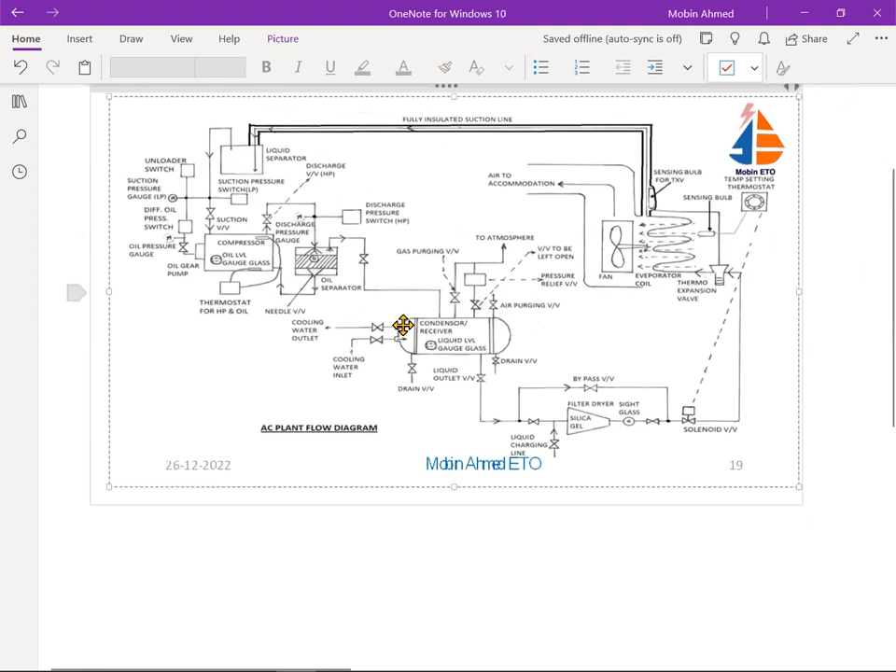Okay, let's start from the AC plant today. AC and refrigeration. We'll try to see this one and try to complete it today. Here is a diagram of the flow diagram, you can say, or P and I diagram. Generally it is known not as a flow diagram, but P and I. So let's see how it is going to work.

Before going to this one, I hope everybody knows about this pressure enthalpy or temperature entropy diagram, because that is important to understand. So we will talk a little bit about this. Now basically any refrigeration plant which is going to work is going to do basically 4 processes. AC or refrigeration systems do 4 processes. So what are these 4 processes?

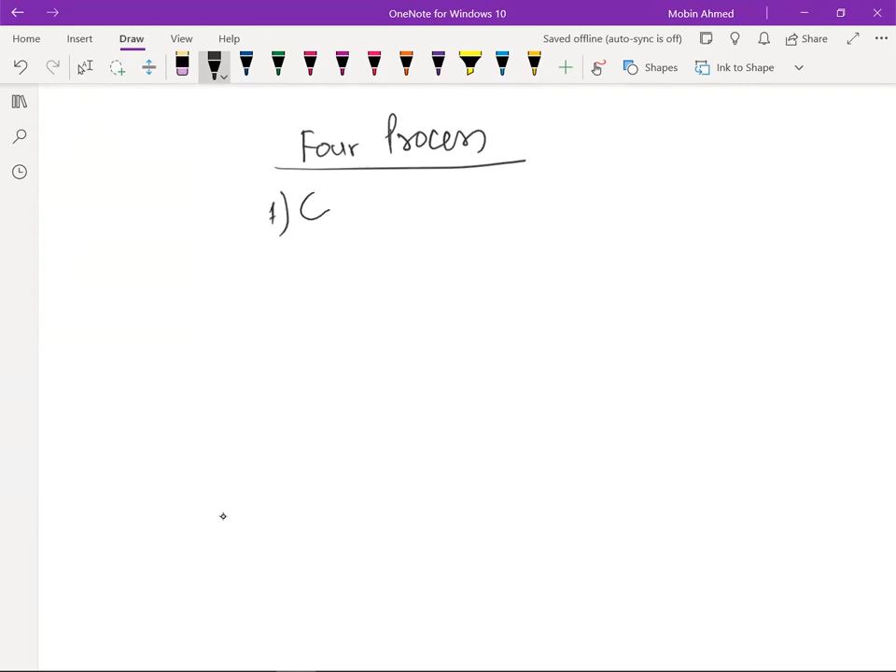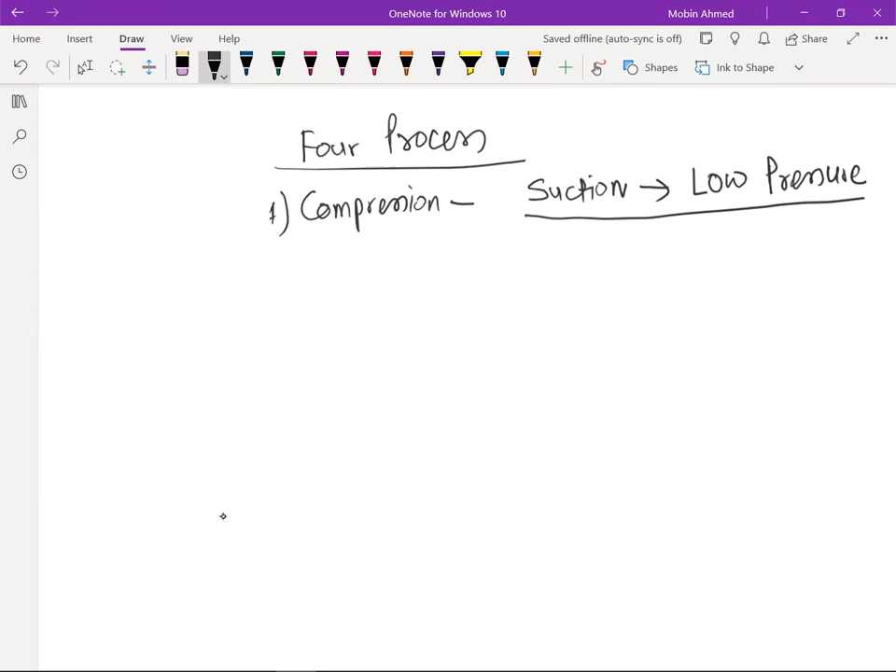First is known as compression. That means whatever vapor is coming to the compressor, that is the low pressure side or suction side. So that is known as the suction. This suction is low pressure. And that's why sometimes we say this one is an LP line or suction line. Okay, so this is the LP line.

So this low pressure, what is low pressure basically? What is coming to the suction? So the LP line is supposed to have only the vapor. That is what we say in general language, gas. So only the vapor is supposed to be coming to the suction line.

Now, when it is going to be compressed by the compressor, after the compression, it is going to rise the pressure. Then there is going to be the discharge line. This discharge line is also known as a high pressure line, or HP line.

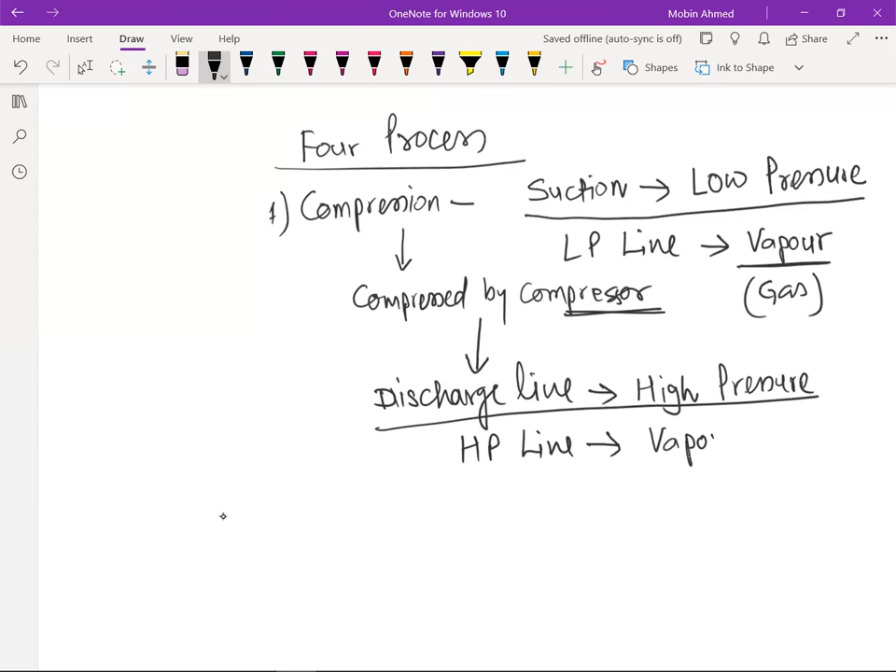When we say HP line, this is the same vapor, but now after the compression, the temperature and the pressure both are increased. So it is going to have high pressure, HP, as well as high temperature, HT. When it is entering, this is LP and also LT, low temperature and low pressure. We'll talk about this low pressure, low temperature, high pressure, high temperature also.

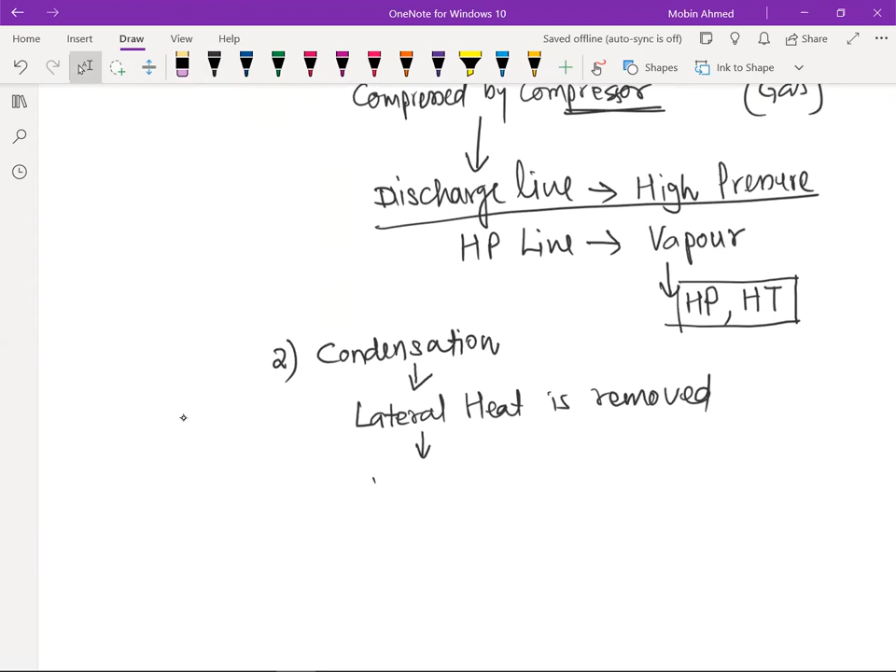So after this one, there is going to be condensation. This is the second process. In this condensation process, basically we are going to remove the latent heat. Latent heat is removed. Now, when we talk about the latent heat being removed, the vapor is still going to be high pressure and high temperature. Only the heat is removed.

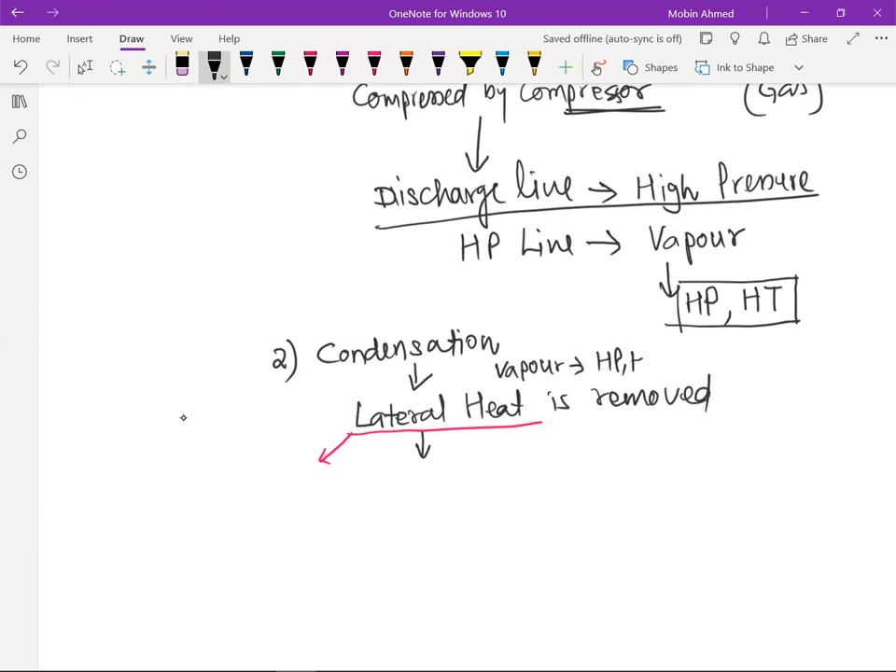Now, what is the latent heat? First of all, I must write here, condensation. So we are going to condense the vapor. And this vapor is of high pressure, high temperature, which will change into liquid of high pressure and high temperature. So what is the latent heat doing? It is changing the vapor into liquid, and this is known as condensation.

What about the pressure and temperature? That is going to remain same. There will be no change in that. Only it is removing the heat, so it will change from vapor to liquid.

Now, the third one is known as expansion. Expansion means to expand. What are we expanding? We are expanding the volume. How is the volume going to be expanded? That means the dia. Now here, expansion means we are going to expand.

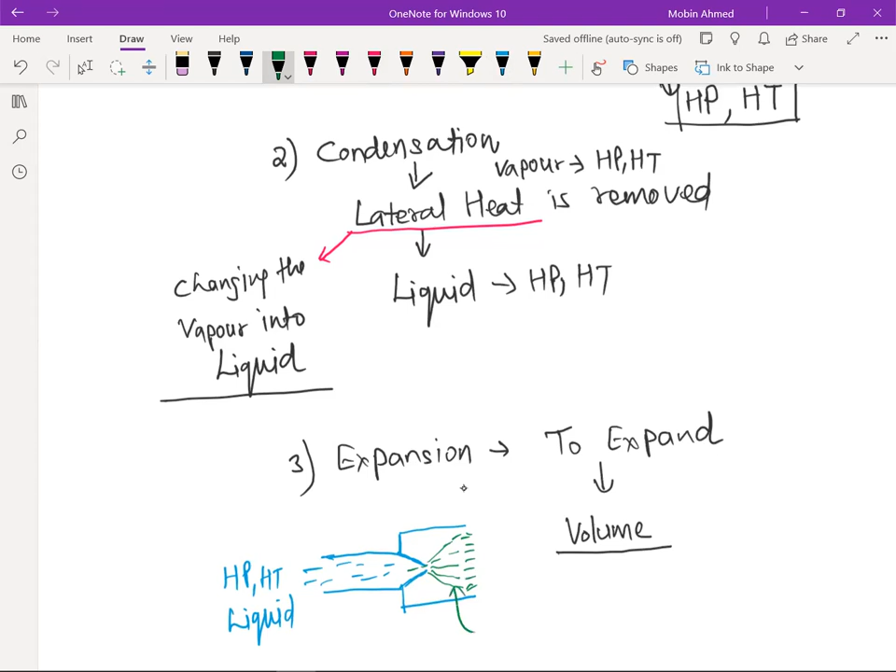So it is going to be a mix of vapor and liquid. That is the one thing when it comes out.

Second, the volume is going to increase. How? Just see here the dia. Suppose this is the dia before the expansion valve, it is D. Then the dia after the expansion valve is going to be 2D, double the D. So the area has increased.

Once the area increases, it is going to expand. So volume increases, and whatever mix of vapor and liquid is there, it is going to expand. Now when it expands, both things happen: the pressure is going to lower, LP, and the temperature also decreases, LT. Both will be there during the expansion. Temperature drops and pressure also drops due to the expansion. So this is known as the expansion.

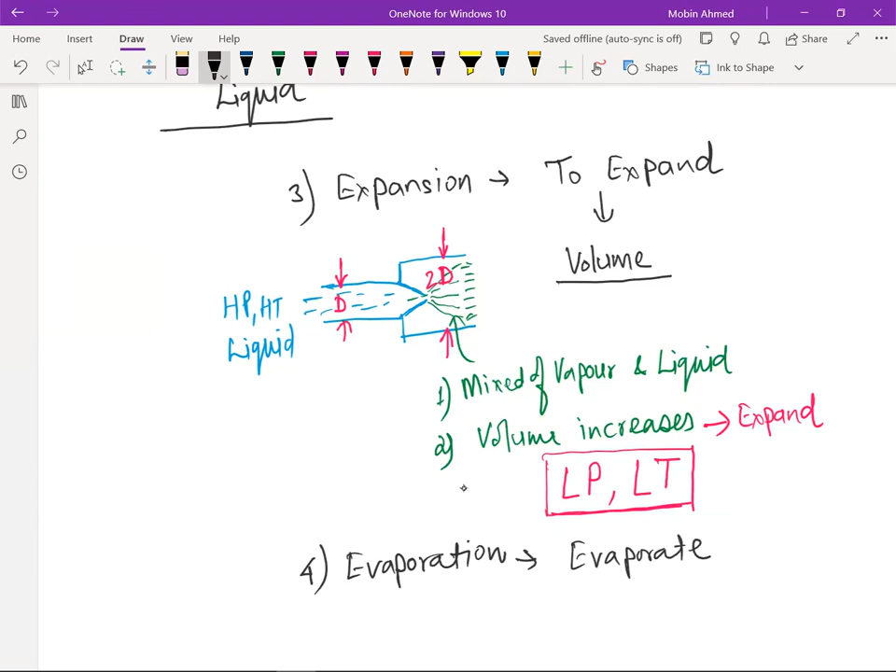Now the fourth one is known as evaporation. Evaporation means to evaporate. What we are going to evaporate now, whatever this low pressure mixture of vapor and liquid is there.

Because it has low pressure and low temperature here, when it passes through the evaporator, it is going to boil off. This vapor and liquid, especially because these are tiny droplets, will boil off because it is going to take the latent heat.

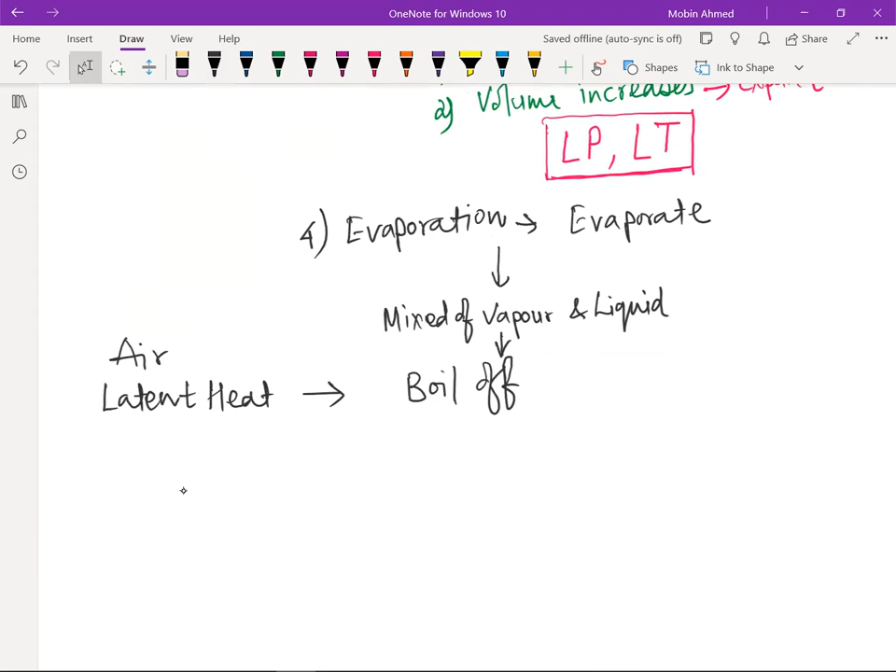Now again the latent heat has come. So it is going to take the latent heat, that is the latent heat. Whose latent heat? This is the latent heat of the air. Here, because we have a fan, it is going to blow the air, and the latent heat of that air will be taken by this vapor and liquid, meaning it is going to boil off.

So what happens when it passes through the evaporator and latent heat is taken by the vapor, this air is going to be cooled down. This is how it cools down, and it will boil off because it is low pressure. So the boiling point is decreased.

Boiling point is decreased. Now when the boiling point decreases, it is going to boil off at the low pressure. When it comes out from the evaporator, it changes into vapor, and this vapor is known as 100% vapor. This 100% vapor is also known as saturated vapor. Now the word saturated vapor has come, we'll talk about this.

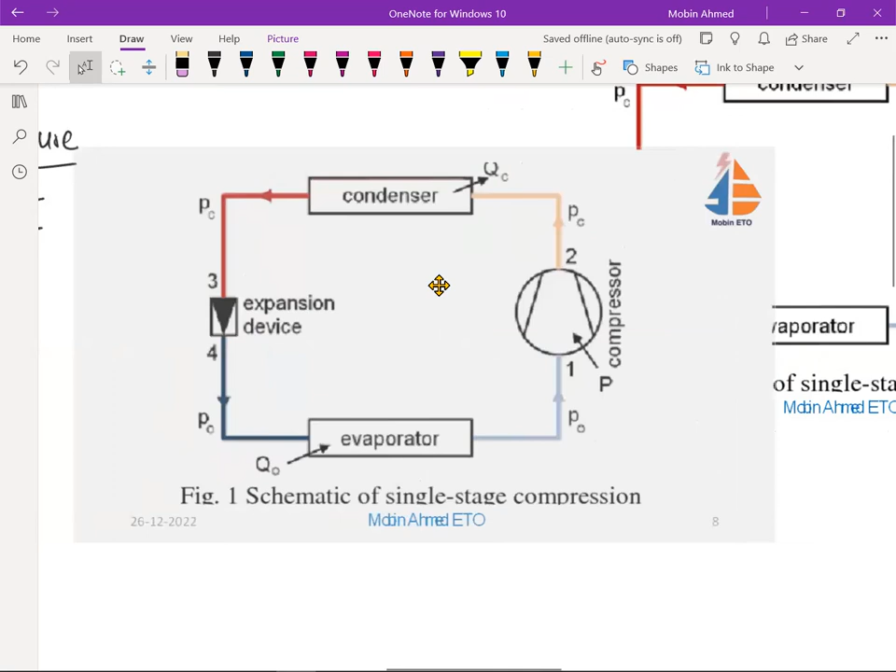These are the four processes, what I was telling you about. These four processes is basically: compression by the compressor, then condensation, then expansion, and thereafter evaporation. So: compression, condensation, expansion, and evaporation.

In compression, here it is going to be PC. Remember this PC. QC is the latent heat, this is the latent heat. And this is the PC. Again, it is going to be PO. QO is again here the latent heat, it is talking about the latent heat. And again this is the PO, and it is going to the compression.

Now when we see about the temperature, here also it is going to come along with TC, it will be PC and TC. Here also TC is going to come, then there is going to be TO, and here also it is going to be TO. What I have written, you will see in the next graph. You can take a screenshot of this.

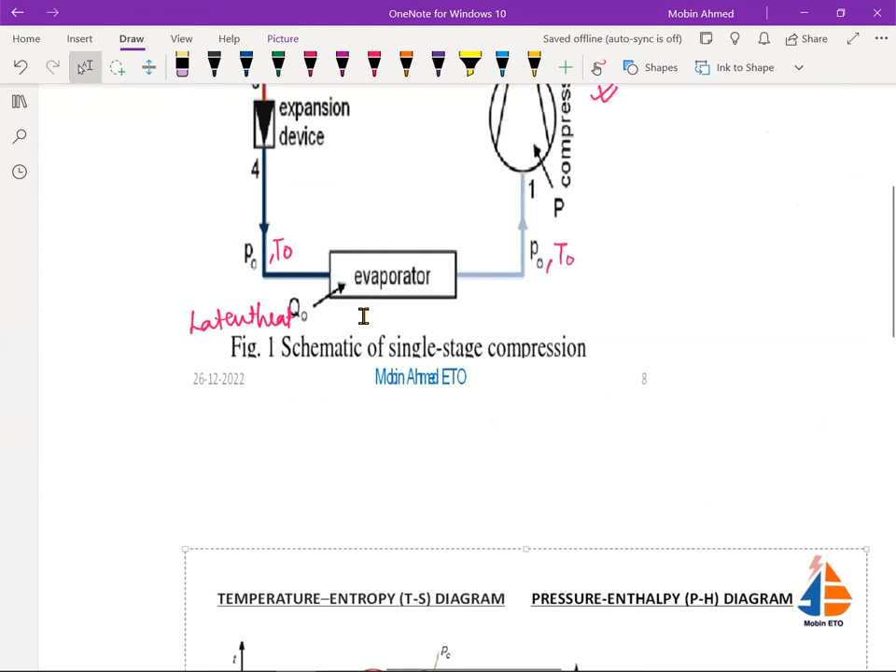There is something known as a temperature-entropy and pressure-enthalpy diagram. No, I am not going to teach you this fully, I just want you to understand this one because it is going to help you understand many things. That's why I am teaching this.

Now when we see the temperature-entropy and pressure-enthalpy diagram, there is a critical point in this one. This is known as the critical point here. The top one, that is the critical point, CP. From the CP to x equals 0, can you see here x is equal to 0? Here also x is equal to 0.

This is known as the saturated liquid line. This is the saturated liquid line. Same, you see here also it is the same.

Then we see here something, this one. This is known as the saturated vapor line. And this saturated vapor line is here also, it is the same. So both graphs are having the same: this is a saturated liquid line and this is a saturated vapor line.

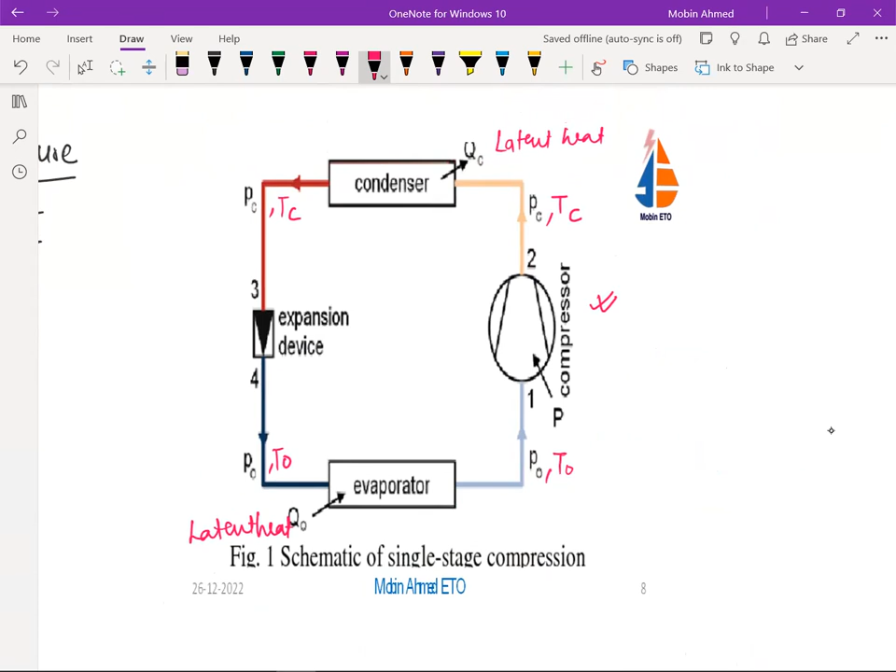Now we are going to talk about the compression among these four processes. If you see this process, from 1 to 2, this is a compression mode. This is a compression. Similarly here also, it is the same, it is a compression. And that is what is shown here: 1 to 2, this is the inlet and this is the outlet.

Now what is it compressing? You can see the inlet of the compression is 100% saturated vapor, or we'll say saturated vapor. Now in this case, the pressure is also low and temperature is also low. That will be the same going to this point. This point is the same, okay, saturated vapor. So this is going to be the same at 1, 2.

After the compression, what happens? The temperature is going to rise and pressure is also going to rise. So this is going to be HP, and in this one we see this is going to be HT. So this 1 and 2 is a compression, so it is going to be high pressure and here it is going to be high temperature. Temperature will reduce a little bit, but still it is going to be high temperature.

So from 2 to 3, or here also, when it is going to enter the condensation, we'll say 2 prime here. Here also I am going to write just 2 prime. So from 2 prime to 3, or here also 2 prime to 3, this is known as condensation.

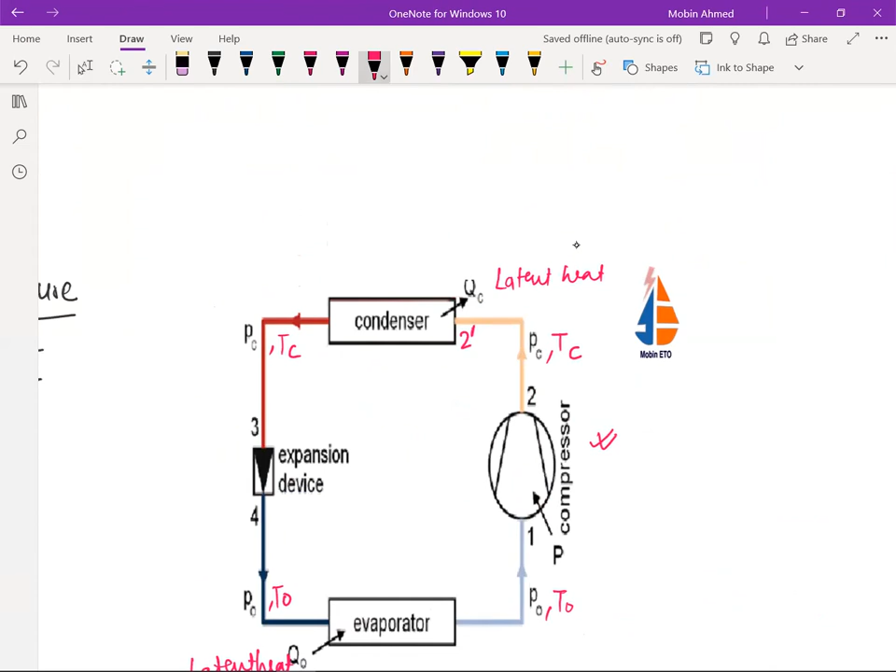Condensation, so this process will start. Here also it is condensation. What you need to notice here is that your pressure is not going to decrease, neither is your temperature decreasing. It is the same line. Here also you can see the temperature is constant, it is not decreasing. From 2 prime to 3, the pressure is not decreasing either, it is same. This means during condensation, the vapor is going to change. So we'll say this is 2 prime, and this is 3 which is coming out from the condensation, that is going to be liquid.

In this case, the latent heat is being removed. So during condensation, the latent heat is removed. Who is removing it? By cooling water. So cooling water is going to take the latent heat, and it is going to change the status from vapor to liquid. When it reaches point 3, it is going to be 100% saturated liquid. So after the condensation, when it reaches, it is going to be 100% saturated liquid.

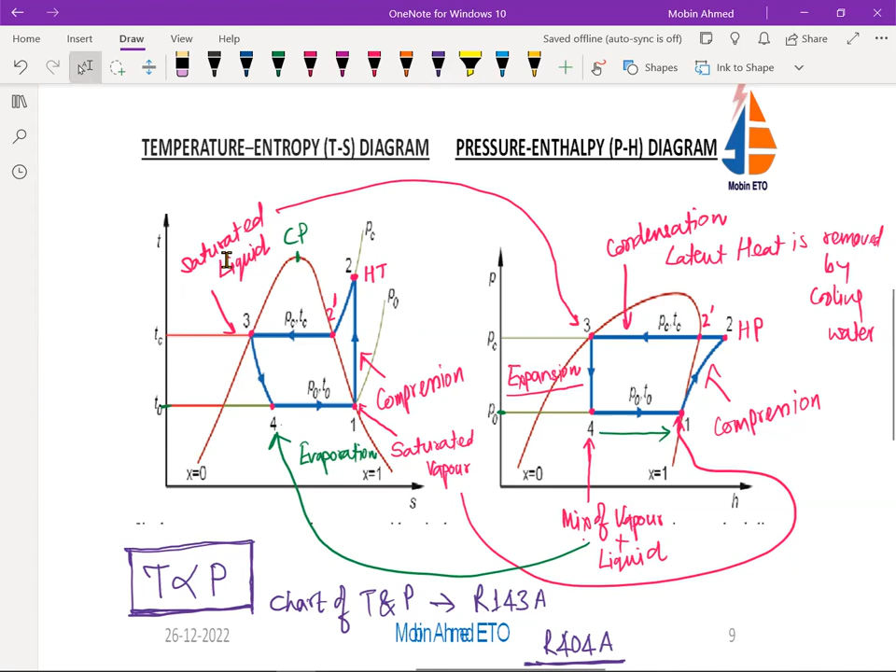If you know any one of them, the second one you can calculate from the chart. Okay. Now, why it was important to tell you, so you can understand. If I say saturated liquid, saturated vapor, mix of the vapor and liquid, now you understand. That is my main motto to tell you about this one.

Okay. Now, let's come here and try to understand this one. This is the diagram, and from the exam point of view, we are going to see each and everything. If there is any question that is asked by the surveyor, try to ask me so everybody knows what question they are asking. Okay, and we'll try to understand how this works.

I will teach you from the view of the electrical system, what all cutouts are there, how they are working and all. I am going to touch on temperature and pressure, or when it is going to change from the liquid to the vapor. That I will be telling you. That is what the flow diagram is. But I will be teaching you all the things from the view of the electrical.

Okay. Now let's start. Here, as I have told you, the compressor, this is the suction line. From the suction valve, it will come here. So this suction line is an LP line, low pressure line. Now, as I have told you, the suction line or LP line has to be saturated vapor. Means when it is entering the compressor, it has to be saturated vapor.

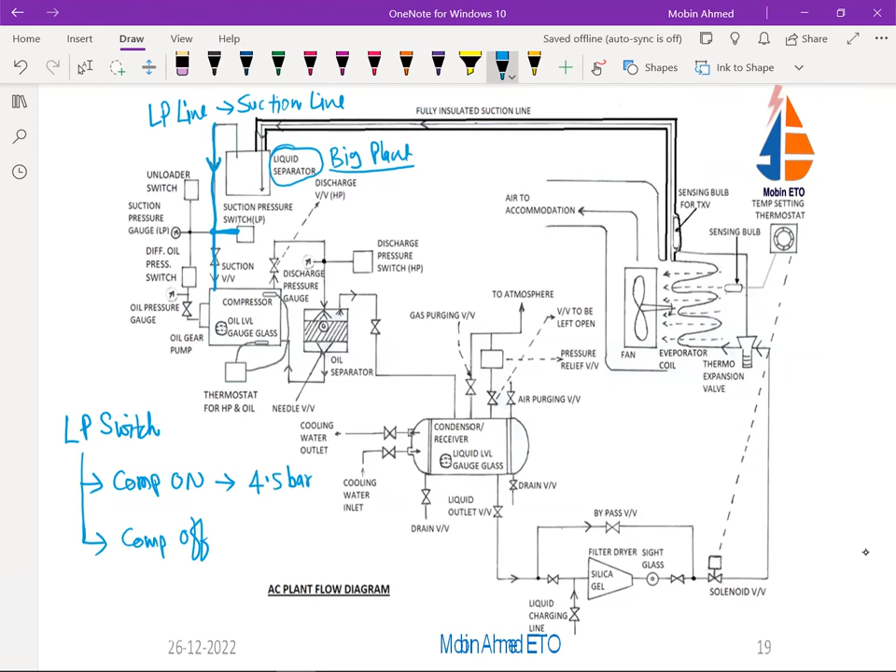So when the LP, that is the low pressure, is somewhat like 4.5 bar, suppose I am taking here 4.5 bar, the compressor is going to be on. But when your LP comes to 2.5 bar, it will be off. So it will protect the compressor from working like a vacuum pump. That's why it has to cut out at the low pressure. Remember this one, this is the LP: at 4.5 bar the compressor will be on and at 2.5 bar it will be off.

Whatever data I am giving will differ from model to model. Whatever I am writing here is just to make you understand how it works. Okay. Hope you understood this one. Now, this is the LP switch. It is a simple switch. One line of the pressure is given to the switch, and the switch is going to work on this, 4.5 bar to 2.5 bar.

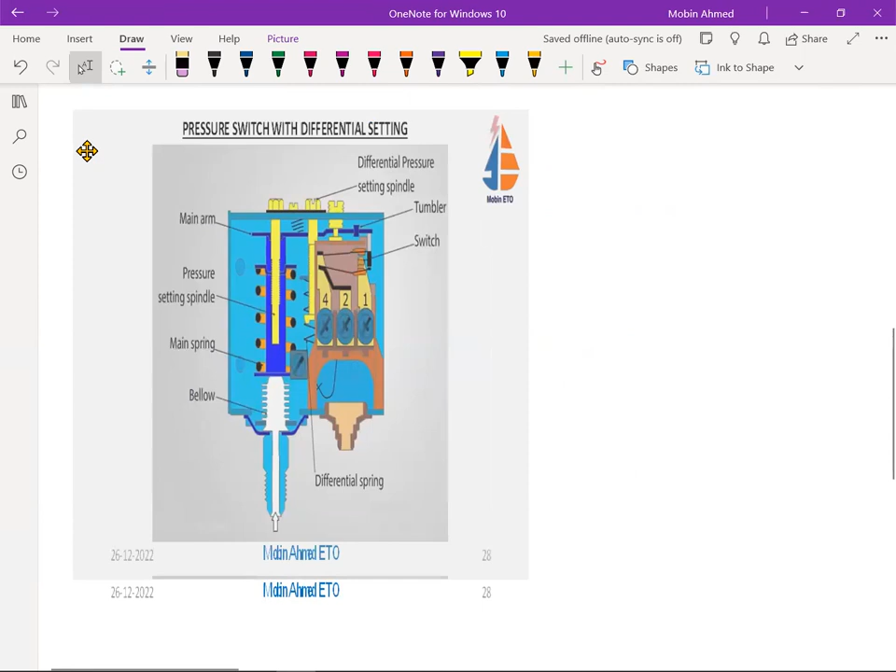How this LP switch looks, if you have seen it, it's okay. If you have not seen it, I am going to show you. This is a pressure switch. You can see. And this is also known as a differential pressure switch. Remember this one. Or this is a pressure switch or differential pressure setting panel. I will tell you about this one.

So, pressure switch. Now what happens in this one when we are going to set the pressure? Here we are going to have two knobs. One knob is here already.

Okay, this is the knob, and the second knob is this one. This is a set pressure. So we are going to have a differential pressure and there is a set pressure. Now as I have written there, you can see 4.5 bar and 2.5 bar. Now, sometimes you are going to see in this differential pressure switch, there are two variants of this one.

One variant says that the cutout is cut-in minus differential. Sometimes it will be written like this: cutout is equal to cut-in minus differential. So what is cut-in? This cut-in is this one, that means 4.5 bar. What is the difference we are setting? 2 bar. So 4.5 minus 2 is going to be 2.5 bar. So this is the cutout pressure and this is the cut-in pressure.

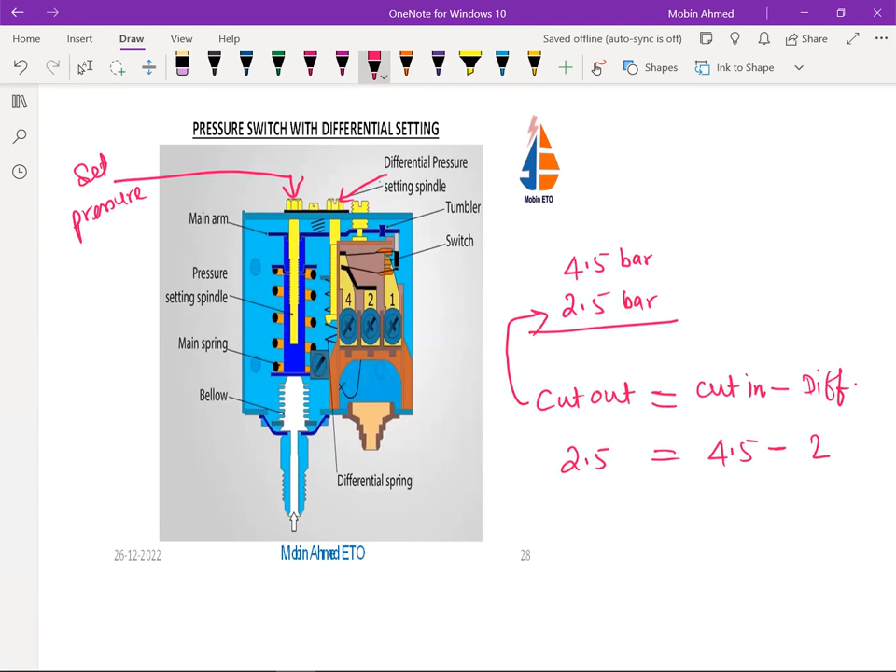That means we are going to have a set pressure here. This set pressure is going to be 4.5 bar. So we are going to set here 4.5 bar. What is the difference pressure we are going to set? That is 2 bar. So this is the setting we are going to do here with this one, and this is the setting we'll be doing here. Now it is going to operate at 4.5 bar, it will be cutting, and at 2.5 bar it will get cut out. Hope it is clear to everyone. So this is the setting of the LP switch.

Now comes the unloader. So this is the unloader switch. The unloader switch is almost the same. It is a direct pressure switch only; generally the differential pressure is not there in that case. Now what is this unloader switch? You can see here there is another switch given, and the same suction line or LP is given to the unloader. So here we are going to have the unloader. Now let's understand about the unloader.

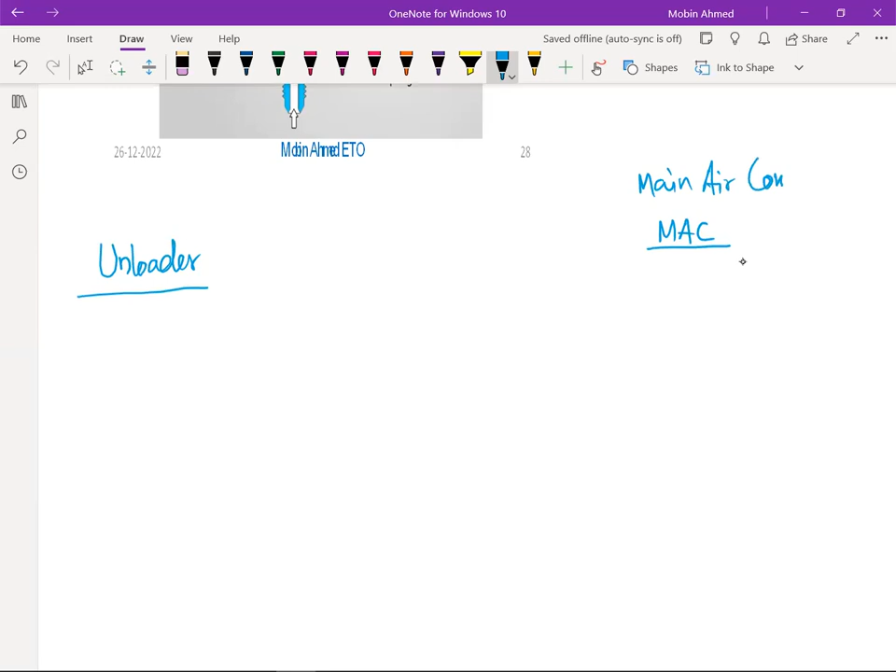Now there is a difference between this unloader and the MAC unloader. MAC is main air compressor. Do not get confused between these. There is an unloader in this also, and there is an unloader in this. What is the purpose of this unloader? The purpose of this unloader is to run the compressor without load during starting and before stopping. That is the purpose of this unloader.

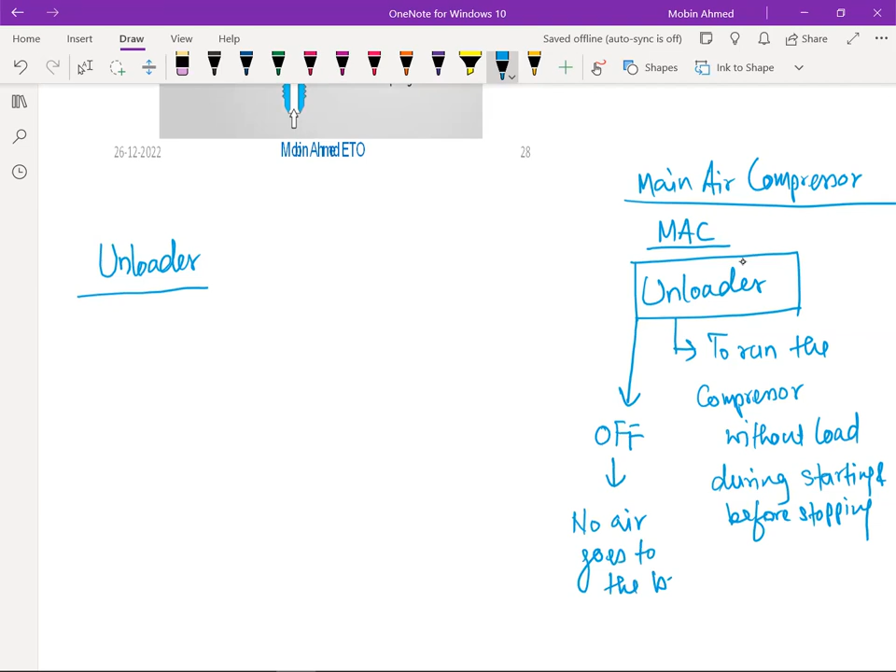Even in between, intermittently also, it goes without load. Without load means when this unloader is energized, when it is on. First we'll see when it is off: then no air goes to the bottle, that is the air bottle. And when it is on, then air starts filling in the bottle. So what happens with this one? No air goes to the bottle, means it drains out.

So why does it drain out? So that any moisture plus oil are removed from the line. That is one purpose. And the second purpose...

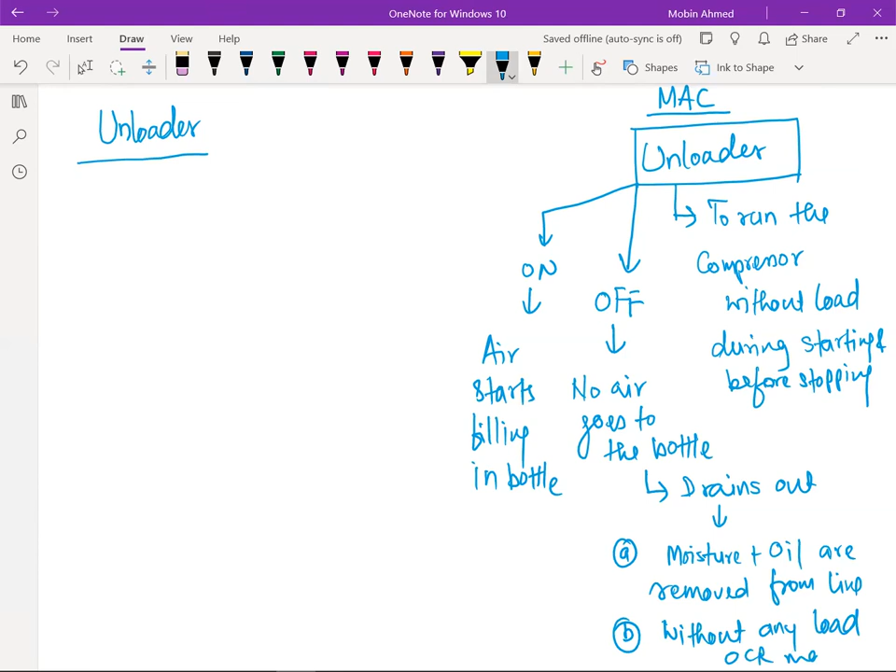Moisture plus oil are removed from the line. And second, during starting, it should be started without any load. Otherwise, the OCR may trip. That is the reason why it is started without load; due to the inrush current, generally it will get tripped. So these are the two purposes. It is going to start without load. Hope it is clear about the MAC.

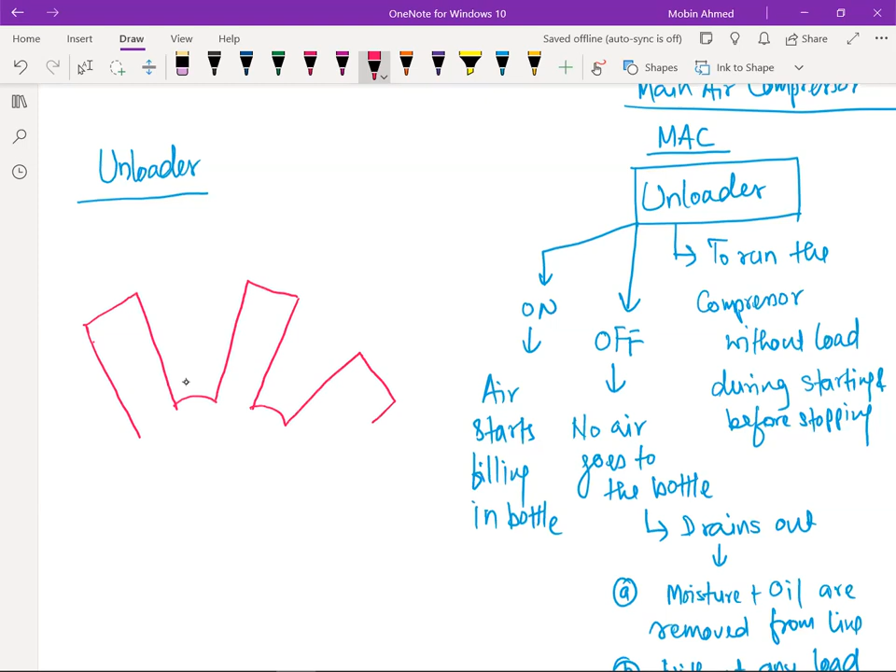Now here the unloader is very different. Here it is used for capacity control. Let's understand what this capacity control is. Now suppose we have a 3-stage or 4-stage compressor. Suppose this is a 3-stage compressor. We are going to have pistons here, like this. Now these pistons are going to be connected to the crankshaft.

Like this, it is connected to the crankshaft. Now suppose this is stage 1, this is stage 2 and this is stage 3. If I am having a compressor of 30 tons, that means it can do 30 tons of cooling. Now, whether it is summer or winter, I do not need to always run on 30 tons. That means I can do a capacity control.

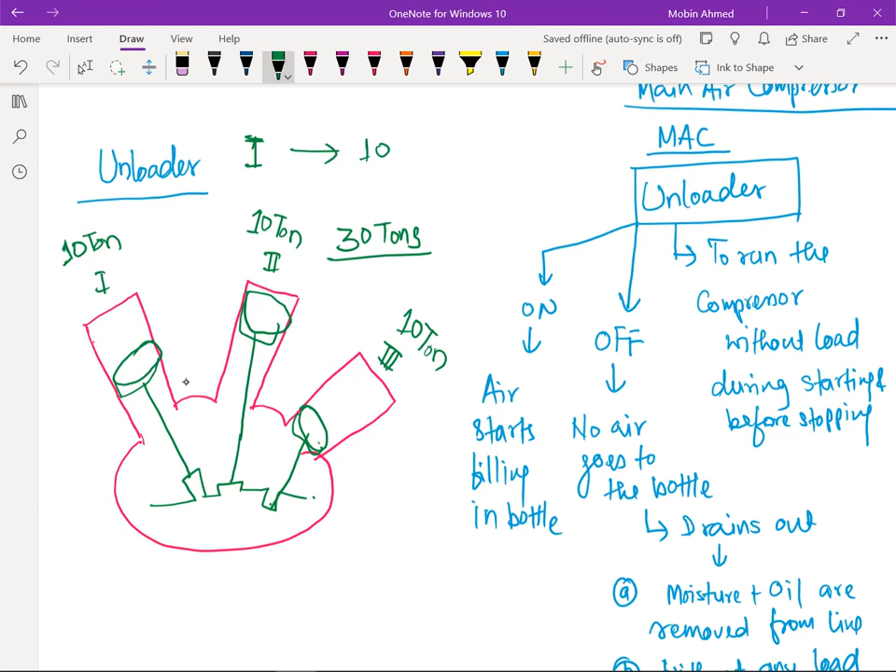How can I do it? This is going to provide me 10 tons, this is going to provide 10 tons of cooling, and this is going to provide 10 tons of cooling. Then, as the temperature increases, first I will switch on number 1. So number 1 is going to be on, and it provides 10 tons of cooling. Now if the temperature is rising, the second stage is also going to be on.

Let me write a little up. So initially, I'll switch on only stage 1, giving 10 tons of cooling. If the temperature is rising in the accommodation, I will switch on both, giving 20 tons of cooling. Now we are almost in the summer region and further cooling is required, so all three stages are on, providing 30 tons of cooling. This is how we do capacity control. That means this unloader is doing a capacity control.

Now, how is it going to sense when it has to go for 20 tons or 30 tons? As I have told you, temperature and pressure are directly proportional. Remember this one again. When the room temperature rises, the LP, low pressure, is also going to rise.

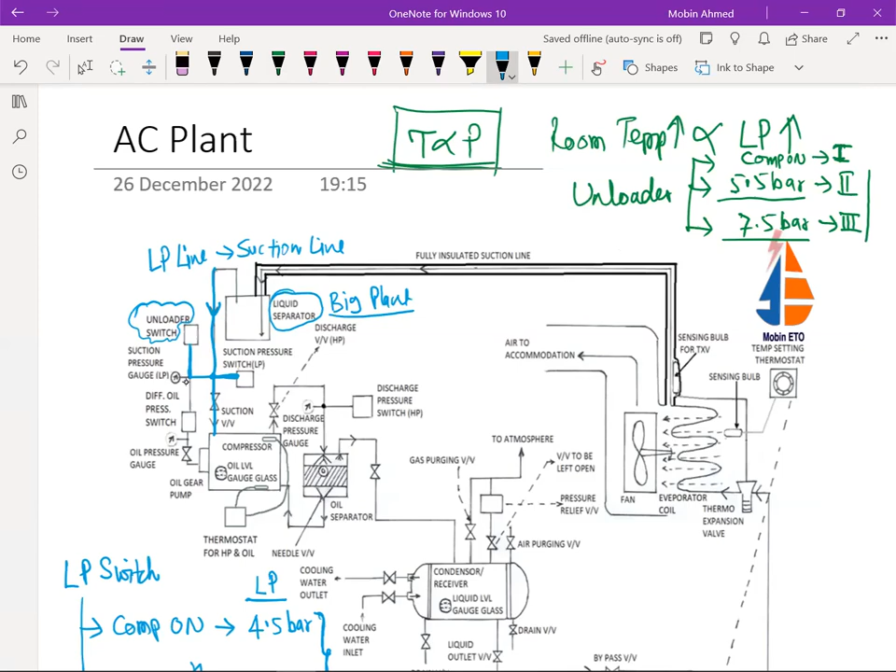This is the question I've been asked. Next. Sir? Yeah, tell me. Sorry, once again, how is it draining out moisture and oil from the line? Which one? Sir, you mentioned inside the unloader. No, that I told for the MAC, not for this. That was for the main air compressor.

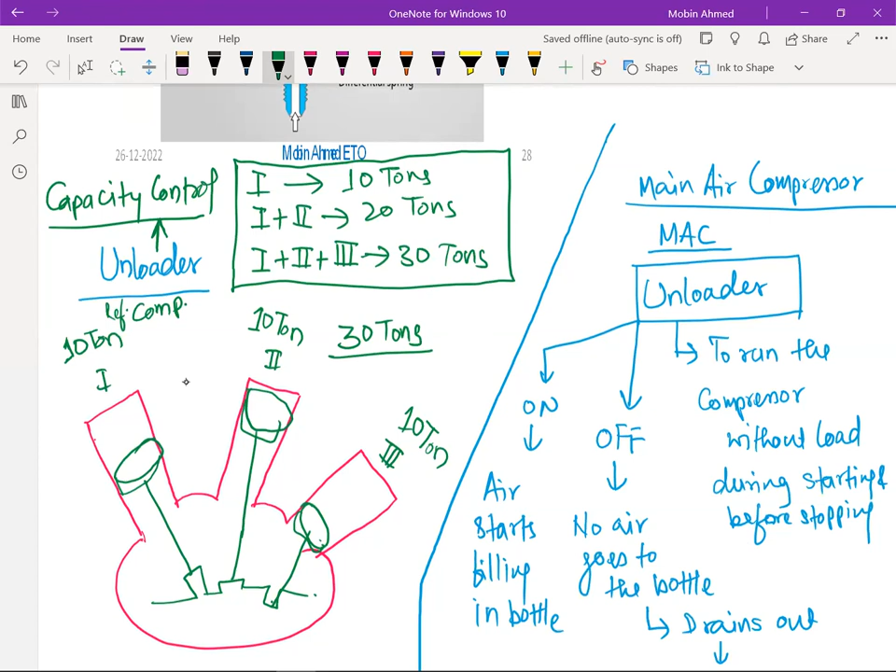So there is the unloader of the main air compressor and that of the refrigerant compressor. Both unloaders have entirely different roles. What I told you here is about the MAC. There is no link between that one and this unloader. This unloader does the capacity control, that's it. It is not going to remove anything. Got it? Yes, sir. This is the refrigerant compressor unloader, whereas this is the main air compressor. Their roles are totally different.

Now, next, there will be the gauge: the suction pressure gauge or LP gauge. You can see the LP gauge here. This LP gauge is generally a compound gauge. What is a compound gauge? I will tell you about this also. I have a photo.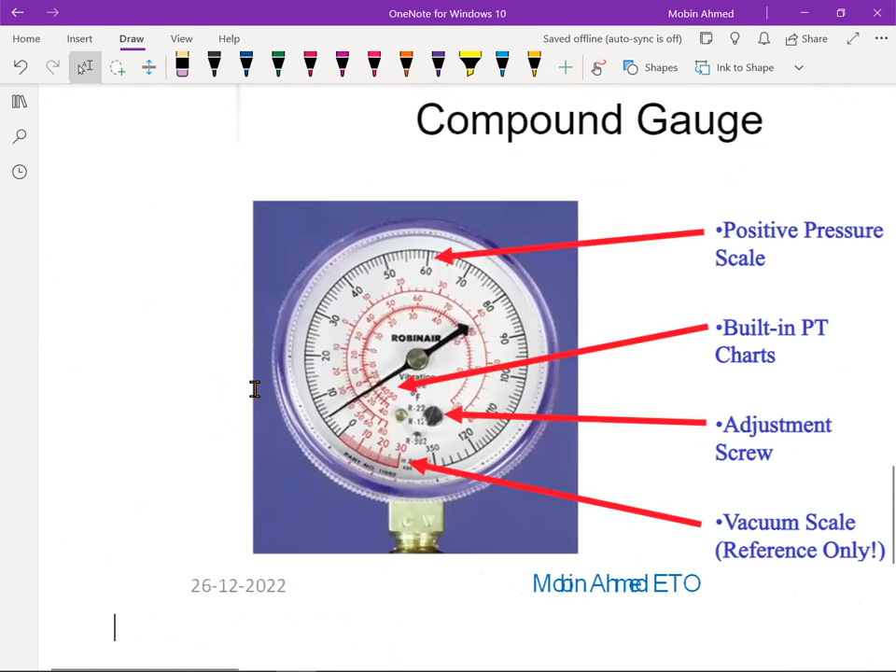Okay, this is going to be a compound gauge. Here you can see. Now, what is the meaning of the compound gauge? Compound gauge is, if you see in this one, it is going to have the vacuum scale. You can see from here to here. This is a vacuum scale. Whereas from here to this side, it is a positive pressure scale. That is this one. Other than this one, this is a positive scale.

You are going to have both in this. It is negative and positive also. Second, this LP gauge is generally always having a built-in PT chart, pressure temperature chart. If you see clearly here, this is going to show you the pressure, and here inside it is showing you the temperature, and there are the different gases, R22, R12, or something not visible, that is given. So accordingly, you are going to have here the temperature. So whatever the pressure, you can see the temperature of that. So it is going to have built-in PT charts also.

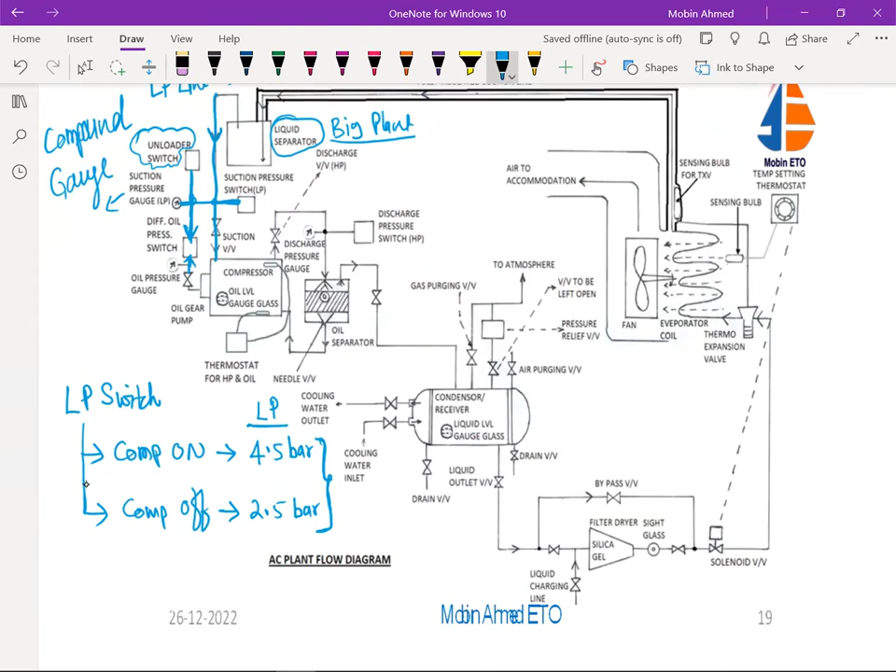Now coming to the differential oil pressure switch. This differential oil pressure switch is going to have two pressures. One is the LP pressure and one is the gauge pressure. Here, oil gauge pressure you can see. So these two are there. We need to understand how it is working. Let's see about this.

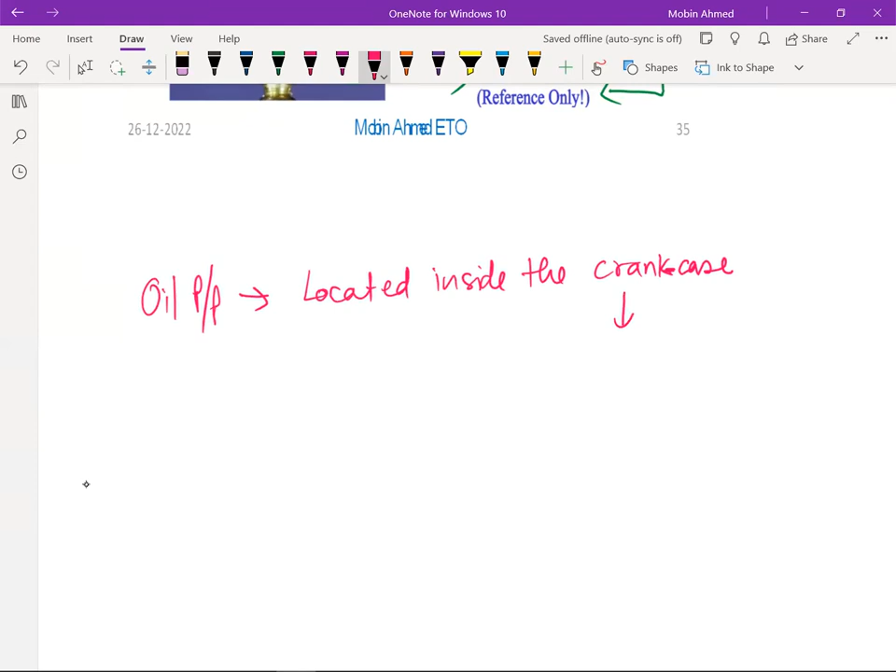What happens? First of all, we should know that the oil pump is situated or located inside the crankcase. Crankcase is already having the pressure, that is the LP. If the suction line is open, LP pressure is already there. Now, when the pump is going to run, there is going to be a pump pressure, displacement pressure.

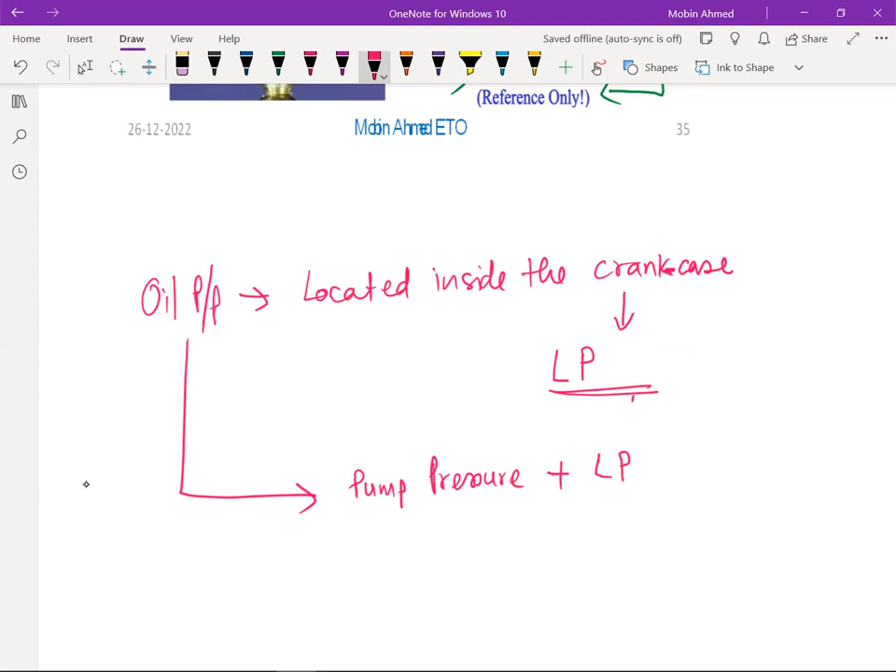Now, already it is having the LP pressure, so pump pressure plus the LP, because the suction pressure is there, so this LP is going to be combined. And if we put the gauge to see the oil pressure, it will show the pump pressure plus the LP both. And this is what is known as oil pressure, meaning lube oil pressure. So this lube oil pressure is going to show in the gauge. So whatever pressure you see in the gauge, it is pump pressure plus LP.

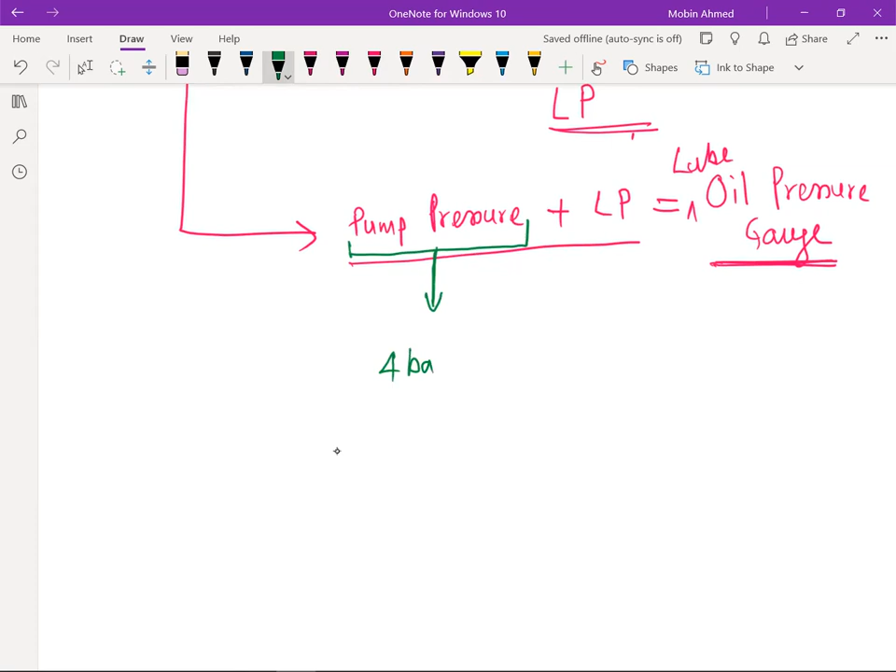Now, we need to understand here that pump pressure is always going to be fixed. It is not going to change. Suppose it is running at 4 bar. It will always have 4 bar. But the LP pressure changes. It is a variable. It is going to change, as I have shown you, from cut in to cut out. Suppose from 2.5 bar to 6 bar. It is changing continuously. I am just taking an extreme one, second stage, third stage likewise. So it is going to change between 2.5 bar and 6 bar.

That means if I am going to get the output here in the lube oil pressure gauge, it is going to show me always 6.5 bar to 10 bar. So this is going to vary, because this is fixed, this is variable. So this is also going to vary as per the LP.

You might have seen your lube oil pressure gauge always showing a higher reading than your LP pressure. Whatever the LP pressure is there, your lube oil pressure should read always higher than that. And this is the reason. Whatever the LP is there, it is fixed higher. You can see 3 bar or 4 bar, it is going to read always higher than that.

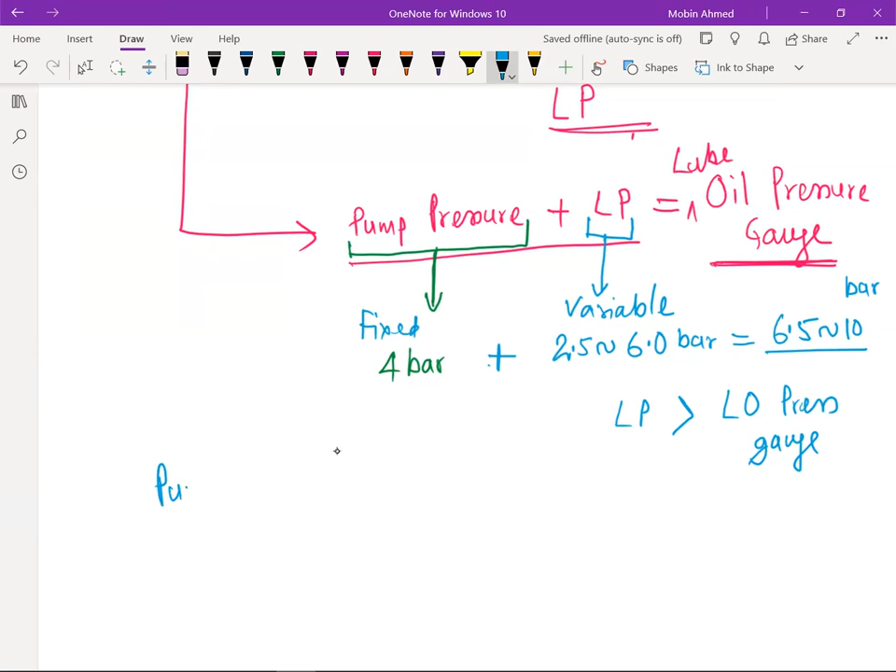Now, how to make an LOLP trip? Because we'll never come to know what is the pump pressure. So what we are doing, to know the pump pressure for the LOLP trip, we find it as the gauge oil pressure minus LP. So this is known as a differential pressure, the differential pressure of the gauge oil pressure and LP.

So now, if I want to find out the pump pressure, I know that it is going to be 4 bar. Gauge oil pressure here, suppose it is 6.5 bar to 10 bar, minus this 2.5 bar to 6 bar. Because this is fixed or constant, it is always going to be 4. Now I set a limit here that if it is going to be less than 1 bar, there should be an LOLP trip. This is the setting.

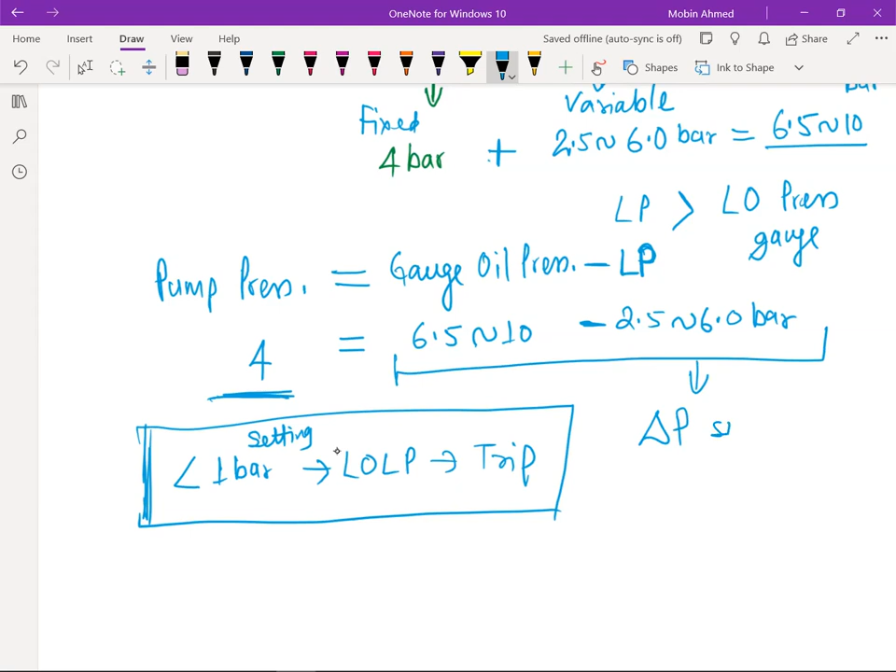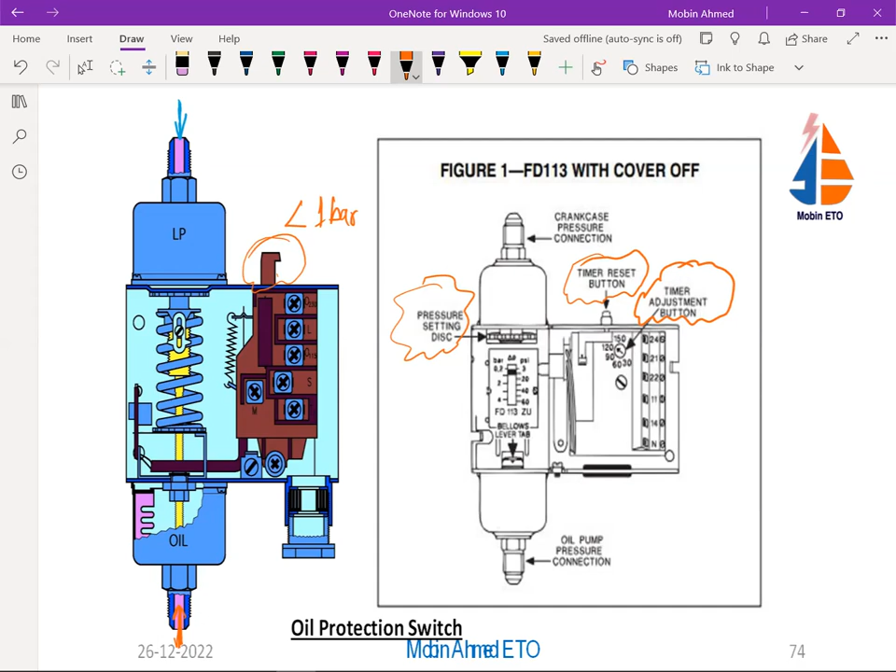This is the oil protection switch. Hope it is clear. Any doubt in this? So this is a differential oil pressure switch or oil protection switch. This is how it works. This is the protection we have here, the differential oil pressure switch.

Now there is another protection also, and this one is at the discharge point. At the discharge point, we are going to have a discharge pressure switch or HP switch. The discharge pressure switch generally works at 24 bar, and it is also a manual reset.

So if it is going to be 24 bar, it depends upon model to model what it is there. So if the discharge pressure is going to go beyond 24 bar, it will trip the compressor. This is the safety of the compressor.

Differential oil pressure switch, this is a safety. Discharge pressure switch, this is also a safety. There are other safeties too, like a thermostat. If there is a bigger plant, then we are going to have this thermostat, that is also a safety. If there is a small plant, generally this thermostat is not there.

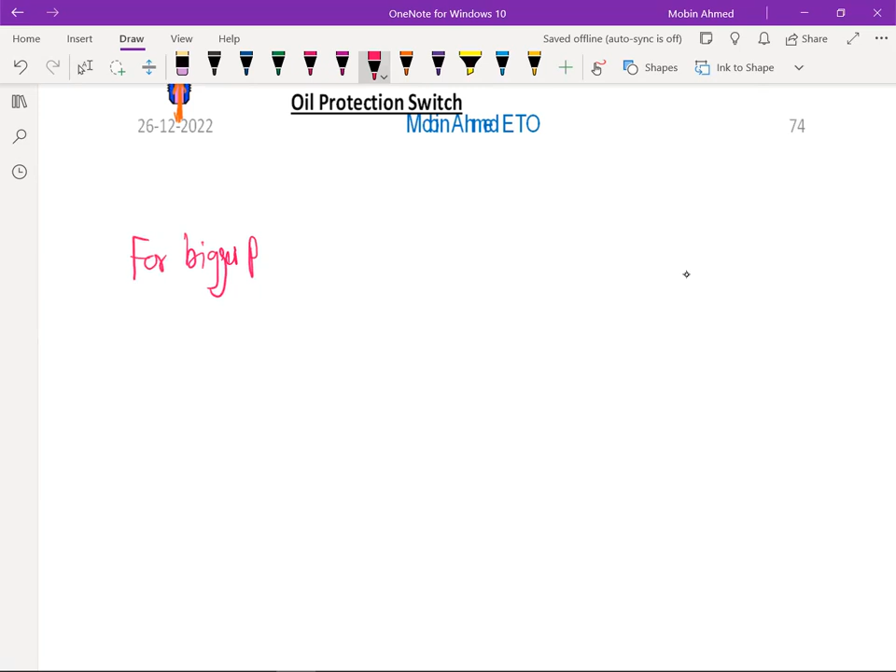Generally, we are going to have a thermostat switch. A bigger plant is generally going to have a motor and compressor, and this compressor is belt driven. In this case, generally you are going to have a thermostat switch. Now this thermostat is also known as a dual thermostat switch.

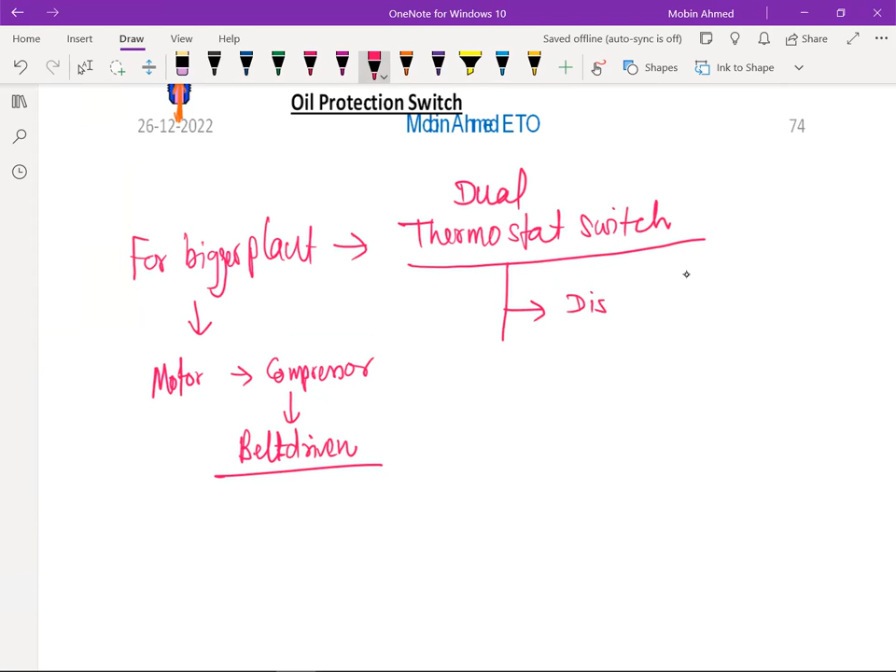Why is it known as a dual thermostat? Because it is going to measure the discharge vapor temperature, and second, it is also going to check the lube oil LO temperature. So it is going to measure that. Now, when the temperature is going to be more than...

...80 degrees centigrade for the lube oil, this is going to operate, and for the discharge vapor it is going to be more than 120 degrees centigrade. So this is generally the setting for the discharge vapor temperature, and for the lube oil, if it is going to be more than 80, because it is going to lose its property over 80 degrees centigrade. So this is how this dual thermostat switch is going to protect the compressor.

Now, if there is a small plant, like small ships, we are having a small plant. In this case, the compressor and motor are together, and this is known as a semi-hermetically sealed or hermetically sealed compressor.

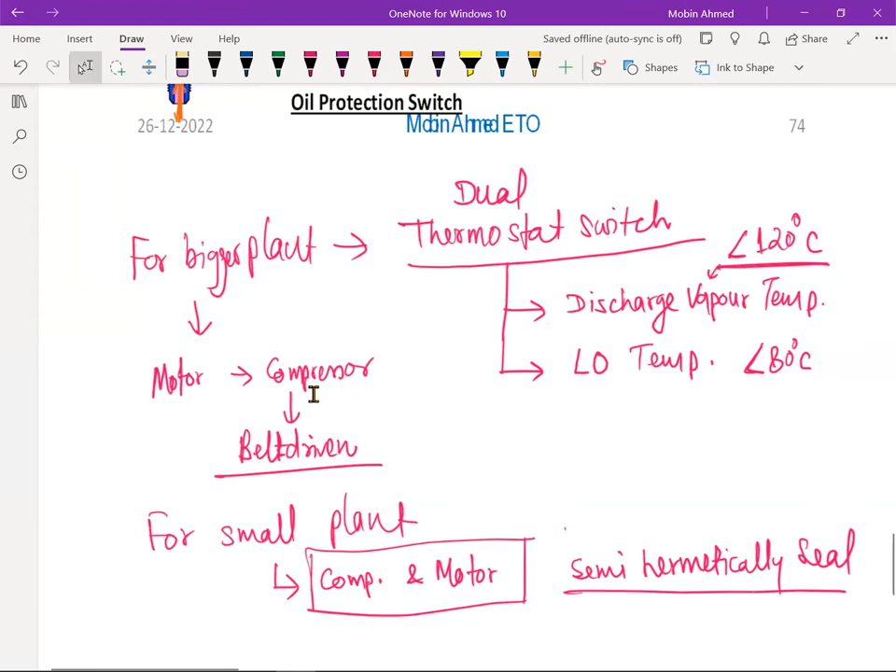So if you are going to have a compressor like this, in this case, the motor is protected. So the motor winding is being cooled by the refrigerant. This refrigerant is going to pass through the motor winding, and it is being cooled by this refrigerant. That means if the refrigerant is not there, or it is not coming to cool the motor winding, in that case the temperature is going to rise.

So the winding is embedded with thermistors, and all these thermistors are known as PTC thermistors. What is this PTC thermistor? That is the positive temperature coefficient thermistor. So this winding is embedded with PTC.

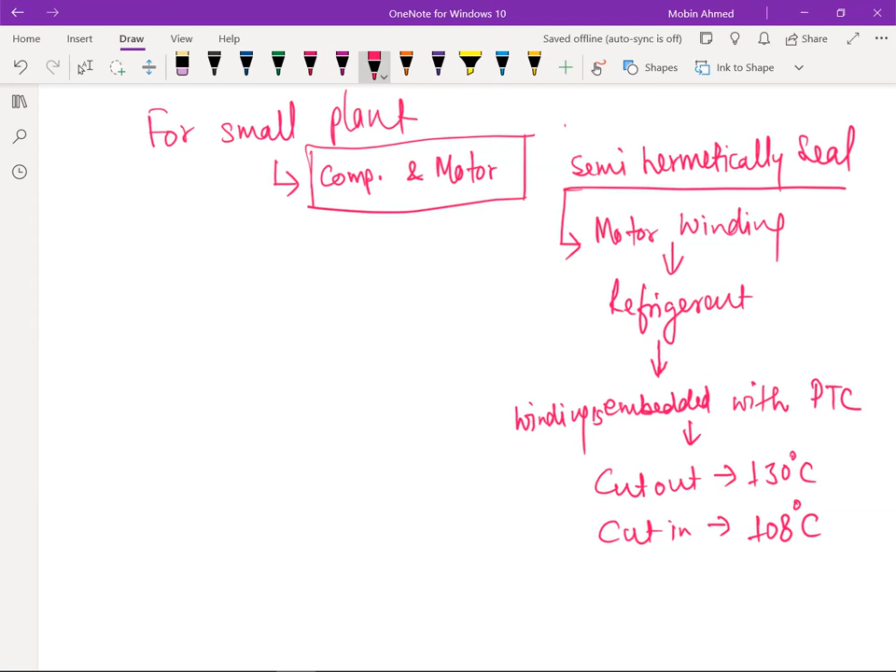So these settings are there for this one, and these settings generally, it is going to trip off or cut out at 130 degrees centigrade, whereas cut in is at 108 degrees centigrade. Meaning, if the temperature goes beyond 130 degrees centigrade, it will cut out. But when the temperature lowers to 108 degrees centigrade, again it is going to cut in. Below this, of course, it is going to be always on, always cut in.

So this is how it is being protected. This protection is known as overheating protection. What is it known as? Overheating protection. Okay, this is known as overheating protection.

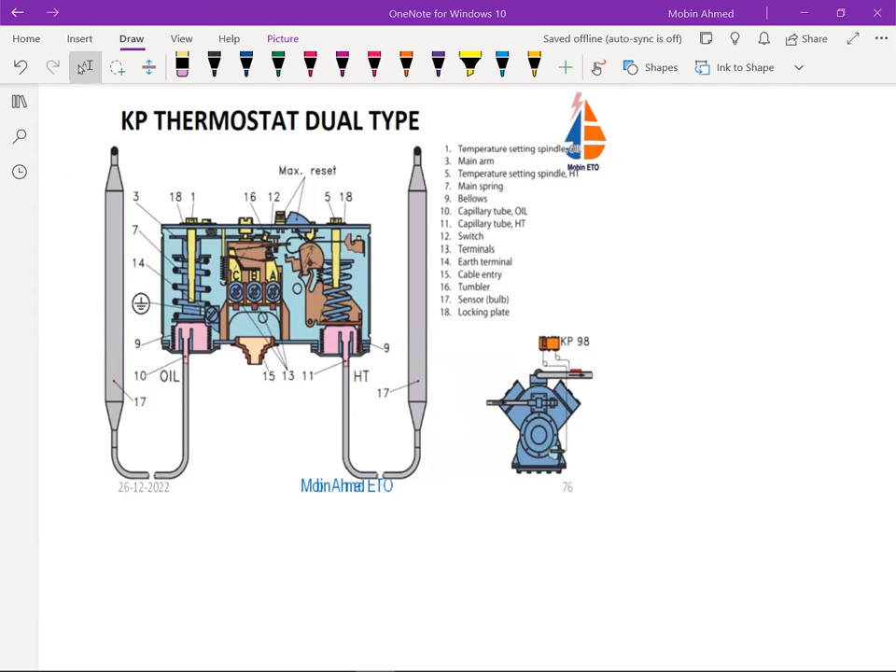And this is the sensor. So one sensor is placed in the discharge line, the second is placed at the crankcase where the oil is there. So it is going to monitor the temperature, and here it is going to monitor the discharge line. Motors, generally in the winding itself, there is going to be the overheat protection. So these are the protections of the compressor motor.

Now thereafter we are going to have the oil separator. Oil separator, because when we are going to compress the vapor, the oil, refrigerant oil, that is also going to be carried with the vapor, and that has to be separated.

If we are not going to separate it, then it is going to give trouble wherever we have valves like this - solenoid valves are there, liquid valves are there, and many places thermostatic expansion valve, this is also a valve. It is going to give trouble because this oil is carried along.

So this oil, suppose if there is moisture in the oil - meaning if air is inside the plant, moisture also is going to come. And if the moisture and oil both mix, then it is going to emulsify. Emulsify means it is going to become solid like a wax, and it is going to give erratic function of the valves.

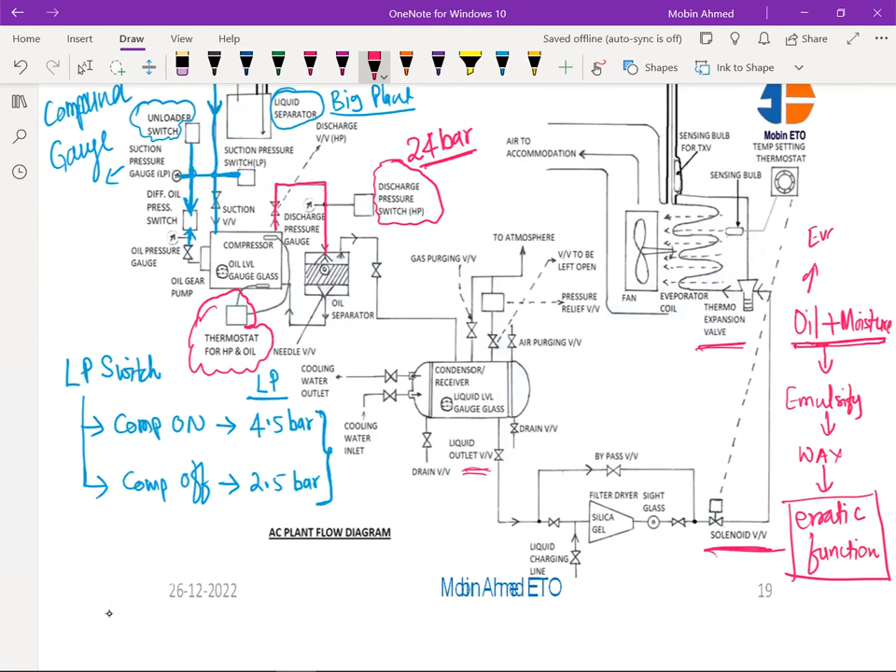Second problem, if the oil is carried and it comes to the evaporator, here in the evaporator - now if it is coming to the evaporator, because here it is low pressure, it is generally going to settle at the evaporator. And if it settles, your cooling capacity is going to reduce.

Cooling capacity reduces. If it is going to reduce, it's because the dia is going to be less - it decreases. Inside, the oil is there in the evaporator, so your dia is going to just get choked by this oil. I'm not talking about moisture, I'm talking only about the oil - it comes and settles at the evaporator, then cooling capacity is going to reduce.

So that's why we require this oil separator, which is going to separate it. There is a needle valve - when it is going to fill up, this valve will operate and oil is going to return back to the compressor.

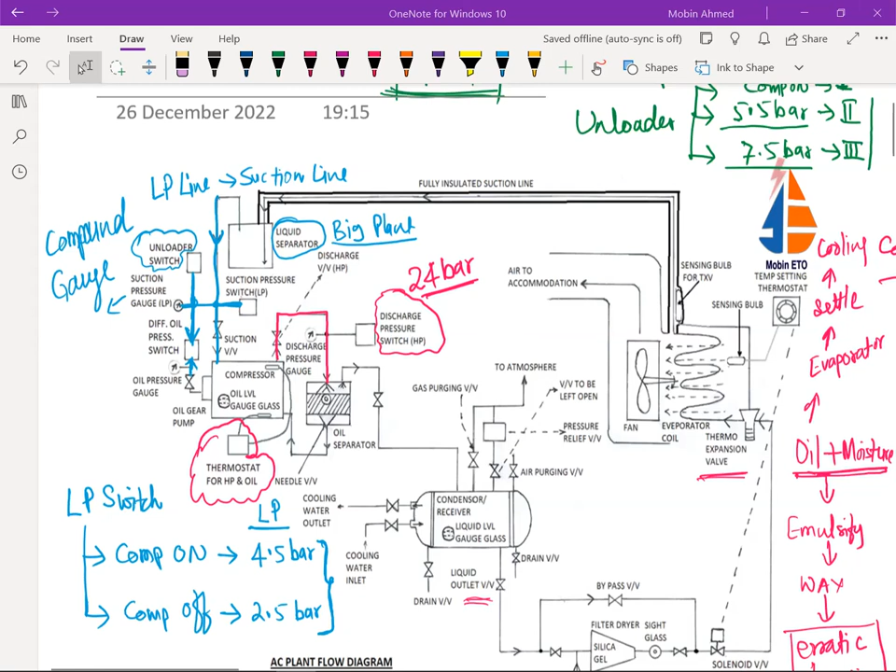Okay, now next, from here the vapor - this vapor is going to be high temperature and high pressure. Already we have discussed about this. So this is high pressure, high temperature. From here again, it is going to come.

To the condenser. Now condenser, if it is a bigger plant, we are going to have condenser plus receiver. If it is going to be a smaller plant, then condenser and receiver both are the same.

Now the condenser, we have the tube. In the tube, we are going to have the cooling water. So there is the cooling water that is going to come to this, and it will condense - the condensation will take place of the vapor.

So there is a gauge glass. This is known as a liquid gauge glass. So here we are going to have the level, and there is going to be a marking in this one. Gauge glass, we are going to have a marking, and it is always mentioned here - this is the minimum and this is the max.

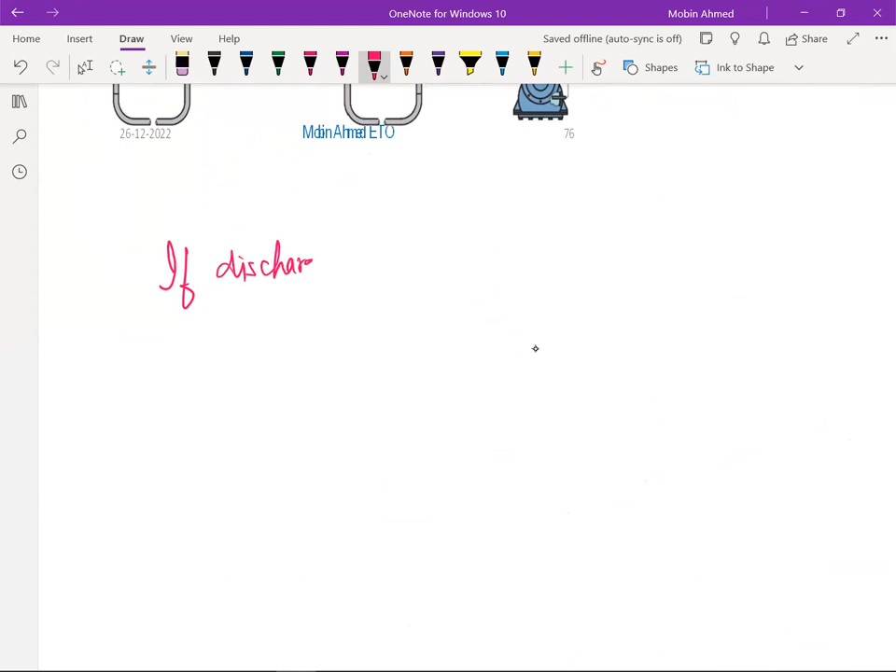Sometimes we see that our discharge pressure is high. If the discharge pressure is high, there are some possibilities. Let me write down one troubleshooting point here because it is important. If discharge pressure is high - now if it is going to be high, there will be many reasons, but these are the most common ones.

Your cooling water flow is less, or the temperature is high. The cooling water which is coming to cool down - either the temperature of that is high, or the flow is less. In that case, your discharge pressure is going to increase.

Now next is if air is in the system - system means the AC or refrigeration system. If air is there, then also your discharge pressure is going to show more than what it's supposed to be. Now, how to check this?

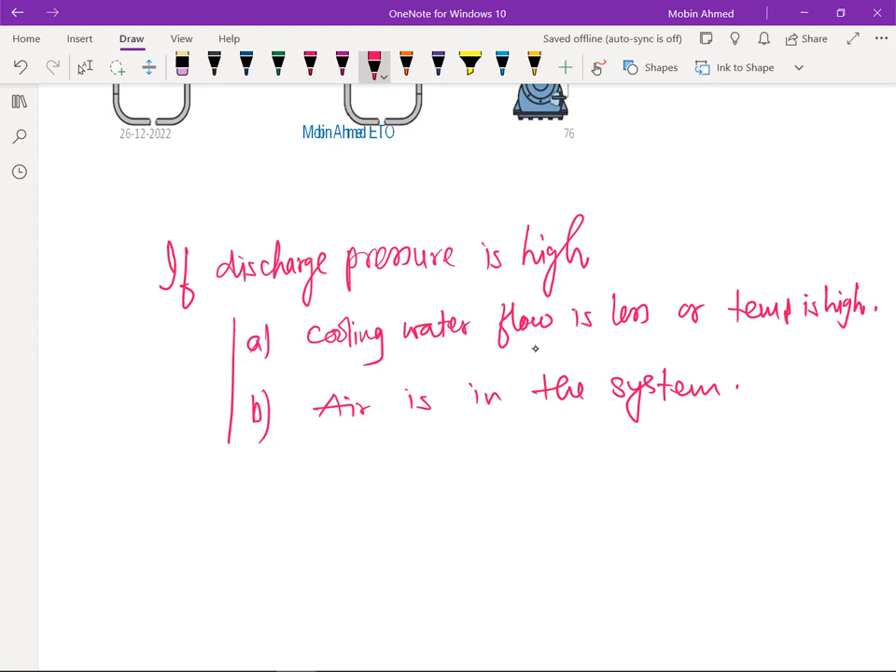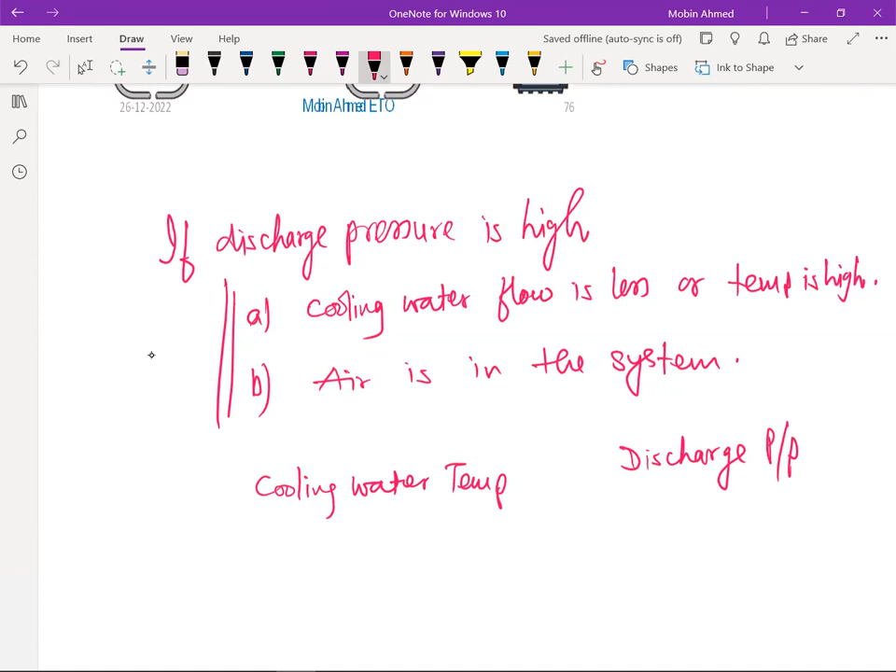There is always a chart given to check this - it will tell you what it's supposed to be, given in the manual. You need to see what the discharge pressure should be at a particular temperature. So suppose the cooling water temperature - how much temperature is there in the cooling water. Generally we have a thermometer put in the cooling water line, so you will know the temperature and what the discharge pressure should be. This chart is always given in the manual - you need to look for this.

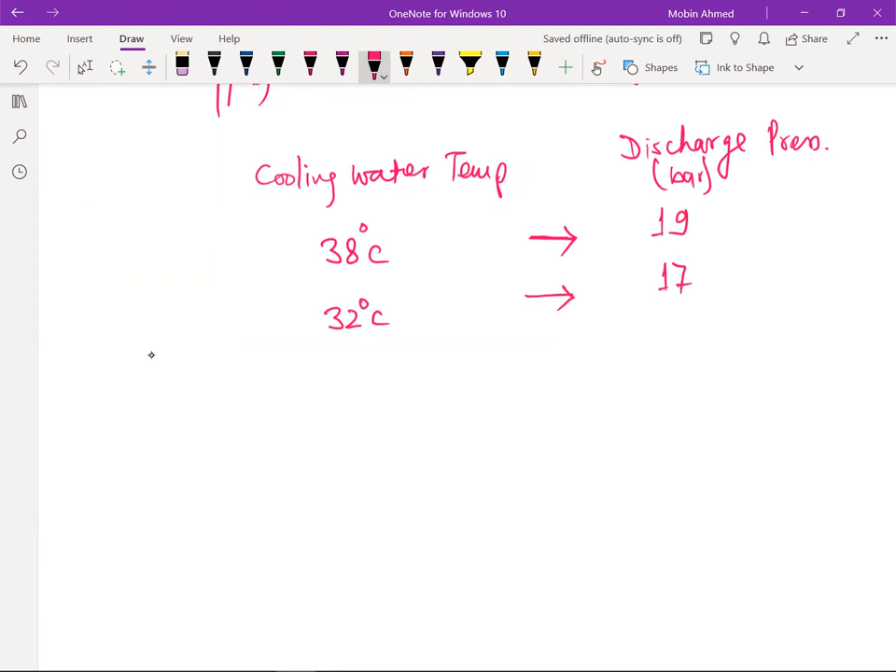Now suppose if your cooling water temperature is 38 degrees centigrade, your discharge pressure - this also depends upon whatever refrigerant you are using, R134a or R404, whatever you use - it's supposed to show near 19 bar, remember. If the temperature is 32 degrees centigrade, it's supposed to show 17 bar. If it is 27 degrees centigrade, it's supposed to show near 15 bar.

If it is going to be 24, it's supposed to show 14. Okay. And always we should keep our discharge pressure more than 13 bar. It's supposed to be in any condition. Discharge pressure has to be more than 13 bar. Okay, if it is going less than this, means there is some problem. So it's supposed to be always more than 13 bar.

And it's supposed to be less than 24 bar. So it's supposed to be between 13 bar and 24 bar: more than 13 bar, and less than 24 bar. So this is about our discharge pressure. So we will just write here the discharge pressure, DP, should be always more than 13 bar, and it should be less than 24 bar. This is the maximum it can go, 24 bar.

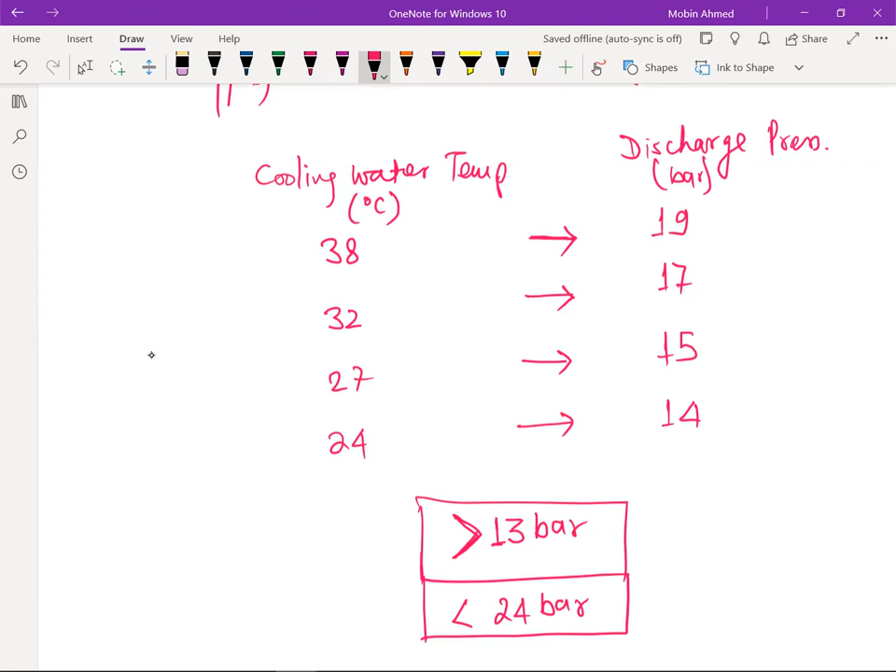Now this you can find in the manual: what is the cooling water temperature and what will be the discharge pressure. Now we are having the LT cooling. So with LT cooling, generally this problem will not come, but if there is seawater cooling, then seawater temperature changes according to region. So your discharge pressure is also going to change. Now in this condition, you will come to know what is the problem, why the discharge pressure is showing more. If it is showing more discharge pressure, these two could be the reason.

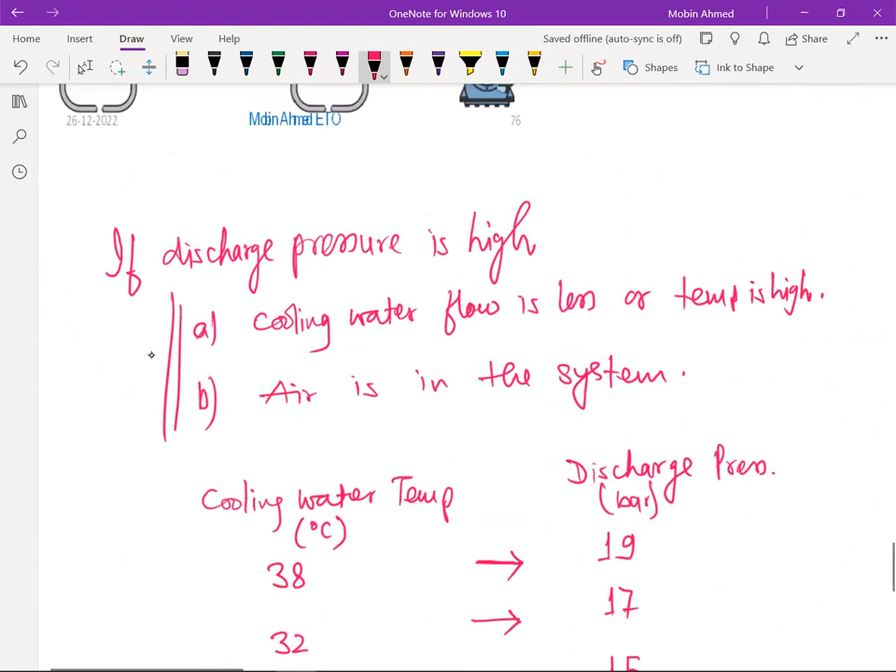One is cooling water flow is less or temperature is high. Second, air may be there in the system. These two possibilities are there. So with this chart, you will come to know. If the cooling water flow is normal, temperature is same as what it is showing, still the discharge pressure is showing high, that means you can conclude that there is air in the system. So this is how systematically you should do the troubleshooting, not blindly.

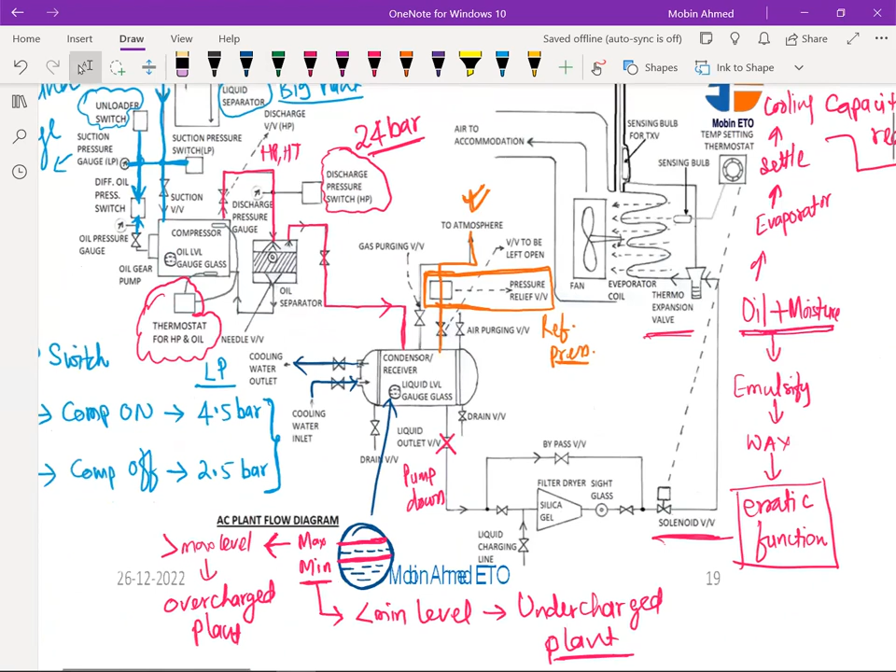Now, in that case, what you need to do, you need to purge the air. Here it is written gas purging. Gas purging means basically we are going to purge out the air through this valve. So we are going to open this one just for 1 to 2 seconds. It is more than sufficient to purge the air. Now how to purge this air? Very systematically you need to do it. You need to pump down first. First is the pump down.

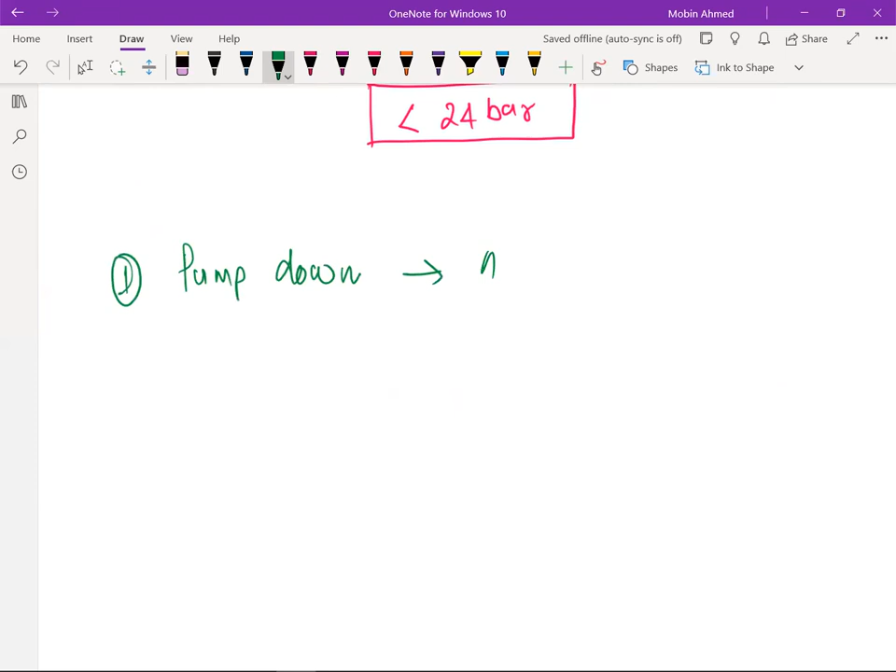So during the pumping down, all the refrigerant is collected in the condenser. Now when it is collected in the condenser, cooling water should be running at least for 3 to 4 hours. Remember, if it is not possible, at least minimum 1 to 2 hours is supposed to be there. So I will just write more than 2 hours. It is very much needed because all the refrigerant should condense and change into liquid.

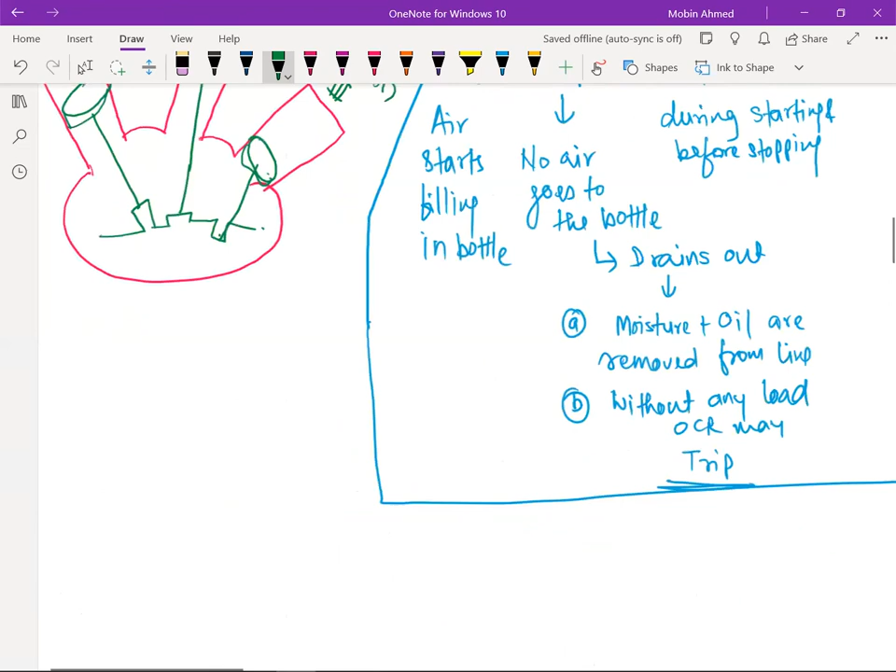Now what will be there? Air. Air is non-condensable gas. It cannot be condensed. So if it is not condensable gas, it cannot condense. So only the air is going to remain on the top of the condenser. Now if it is going to be on the top of the condenser, and already the condenser is having a very high pressure, 19 bar, 17 bar is very high pressure.

Okay, so if you are going to open 1 to 2 seconds, all the air with the pressure, it will be out. You may lose some amount of refrigerant because it is very high pressure, and very quickly you have to do this gas purging, this air purging. This is very, very important. Do not open for more time. Otherwise, you are going to lose your refrigerant. You need to watch your discharge pressure also when you are purging out the air.

Okay, so this is the purging out. Now here also we are having air purging valve, drain valve, here also the drain valve. These all are there for the cooling water line. So when we are going to open for the condenser cleaning, the tube cleaning, that time we need to first drain out. When we need to close this, we need to drain the water. Water will be out, then we can clean and box up back.

After the boxing up, generally we open the inlet valve. This valve is opened first. This remains closed, and we are going to open the drain valve. So all the air will be out through this. Once it is draining, we need to close this drain valve. Then whatever air is there is going to purge out. When the water is going to come out from this air purging, we close this one. This is how your air is purged. So you need to do it in this way.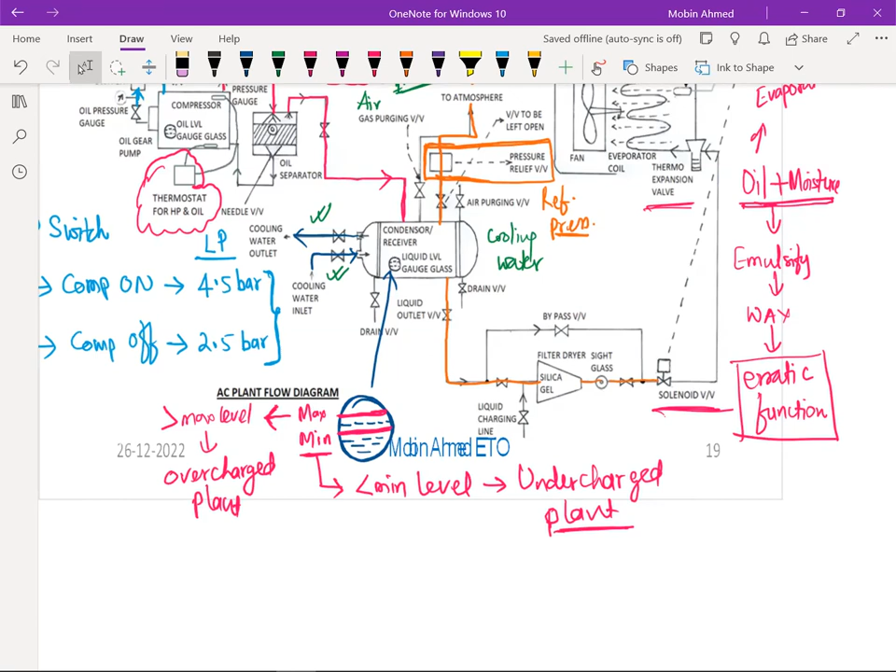Let's see about the silica gel. Silica gel is not used nowadays. In olden days it was being used, but nowadays different types of materials are there, known as a desiccant. Desiccant, I will write it. So these are there along with a sight glass. So this is the modern filter dryer that is being used. I will put it here.

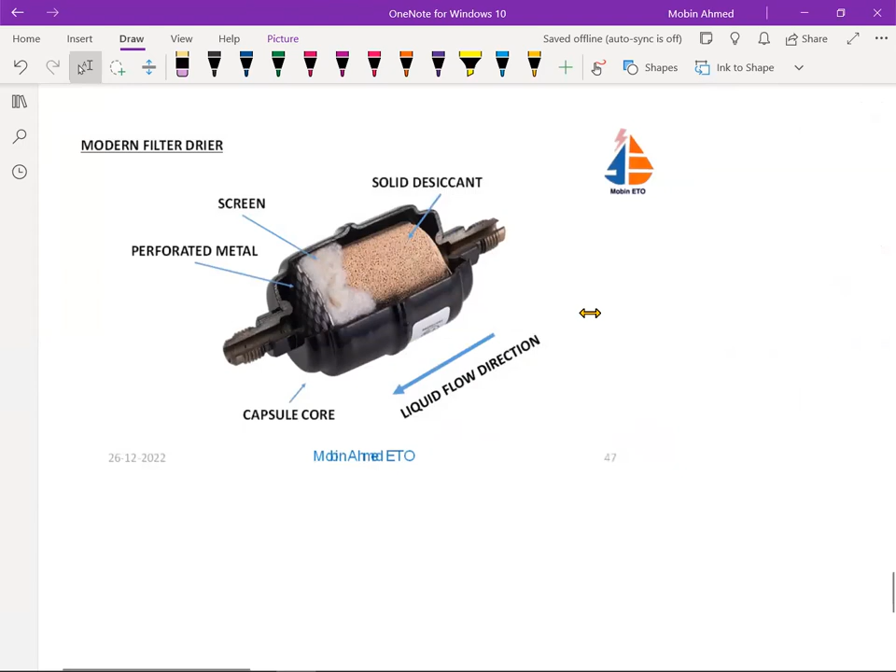You can see this is the module. Nowadays you cannot replace anything; you need to change this full module itself. So this is the solid desiccant, that is what I was talking about. This is the desiccant, so you need to change this module itself. Now here, this is going to absorb. Remember, it is not only going to absorb, it also filters.

It filters any small metal particles, or any particle, not only metal particles, small particles, or we'll say any foreign materials like dust, metals, likewise. If any debris is there, like dust or metals or anything, that is going to be absorbed by this one. So there is a screen, then the metals and desiccant.

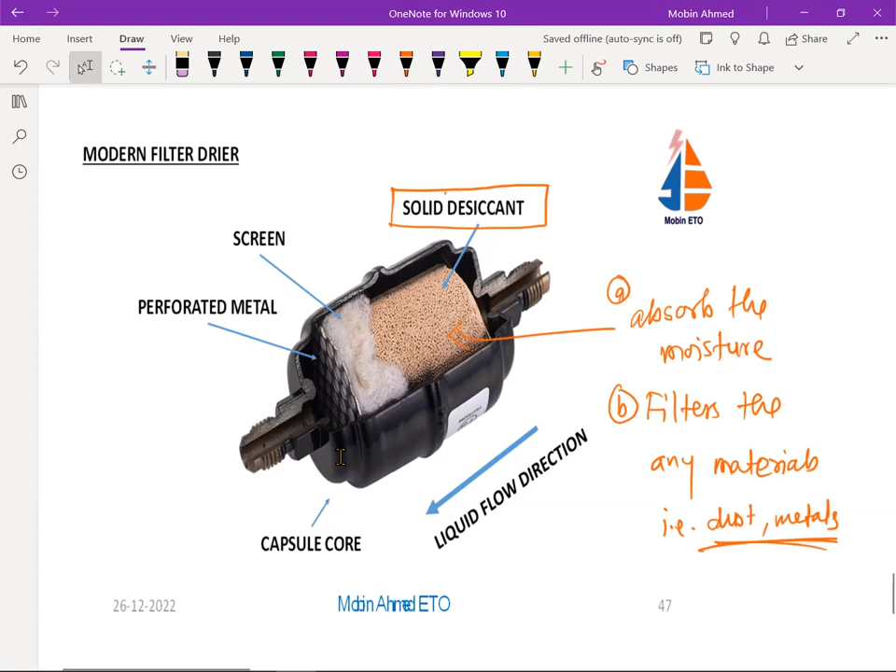Now the direction of the liquid flow is from this side to this side. So this is the modern type. Nowadays we use these filter dryers, and directly you need to change this one. Then there is a sight glass. Now if you see the sight glass, it looks like this. This is the sight glass.

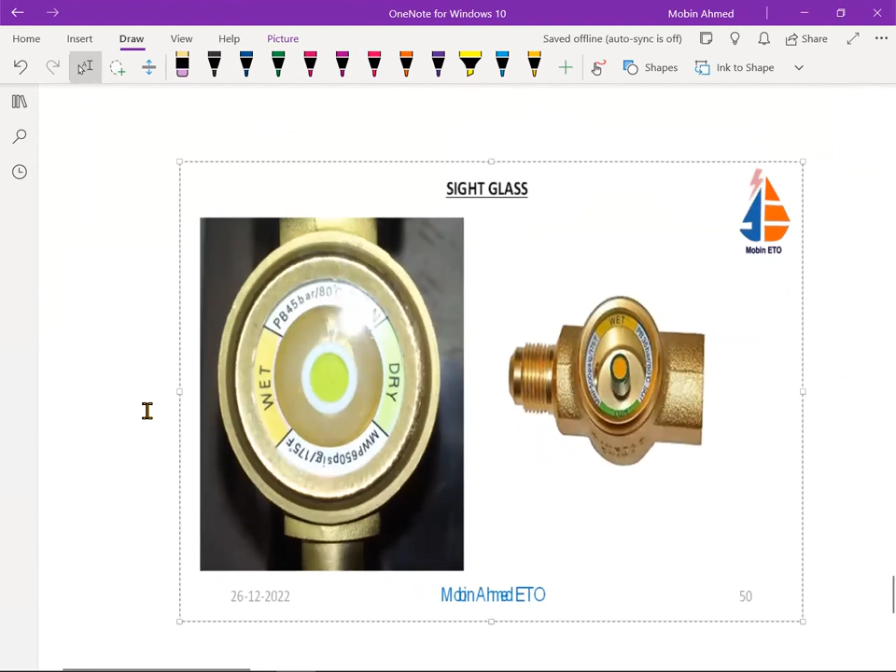Now this sight glass is going to tell you two things. What is the meaning here? The color coding is there, you can see. It says that if there is moisture in the system, that means your filter dryer is exhausted. Exhausted means it is not working now, it is already finished. So you need to change it.

So if the moisture is there, the color will change from green to yellow. I hope it is very clearly given. It is dry here, you can see it is green, and it is written wet. Wet means it is having moisture. Here also you can see it is written wet and dry. If it is dry, it is green, and if it is wet, it will change from green to yellow.

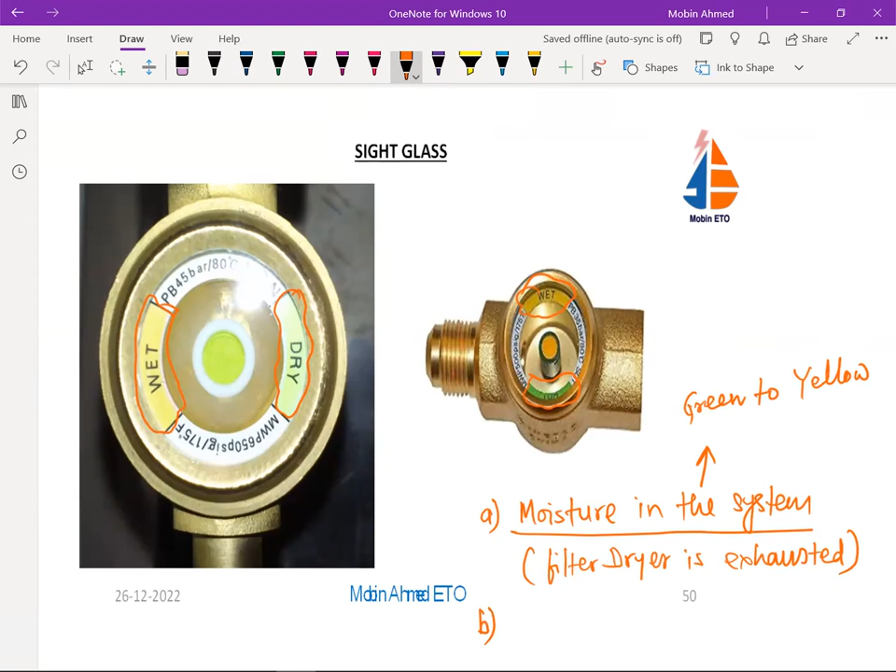Okay. Second indication: it is going to show if there is froth. Froth means bubbles. So if there is froth or bubbles here, I will mark it with a different color. If you see bubbles here like this, or there is froth, like soap water froth, you know it. So if the froth is there, that indicates that there is

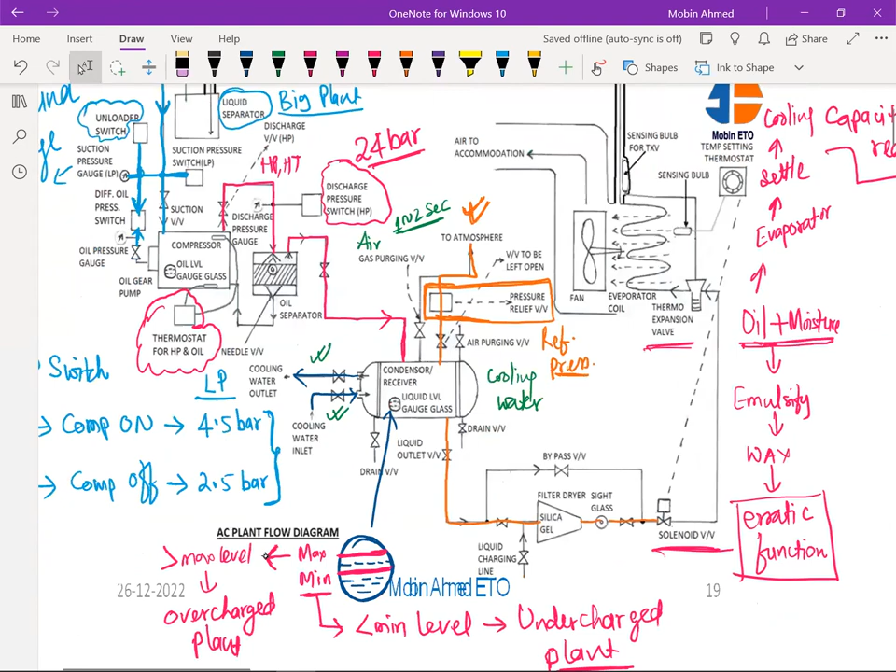a less flow of refrigerant or liquid, because here the liquid is going to pass. Now, if there is less flow of liquid, there may be many reasons, not only one reason. Why is the flow less? If we come back to this diagram again, if you see bubbles or froth here, there could be many reasons.

One reason is that your filter dryer is choked. If it is choked, then there is going to be a problem. This valve is not opened fully or not opening fully, the liquid outlet valve. It is a manual valve, but it can have trouble, and then also you are going to have the problem. There are very few chances of a problem with that.

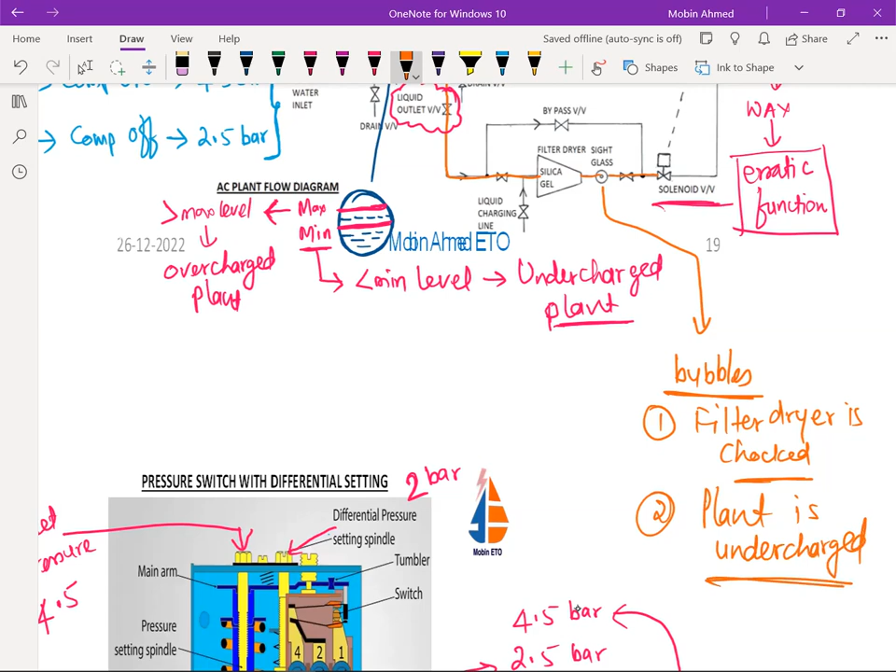But there are chances that the plant is undercharged. Now, how will you come to know that the plant is undercharged? You have to pump down and check the level. If the level is okay, that means your silica gel is giving you trouble, this filter dryer is giving you trouble. You need to change this filter dryer.

But what people do is just charge the plant again and again. Do not charge the plant. You need to go very systematically to understand this system. So if the bubbles are there, that means the passing of the refrigerant is less here. Okay.

Now next, the solenoid valve. What is this solenoid valve doing? This solenoid valve here is operated by the temperature setting thermostat. This thermostat is in the AHU, air handling unit. You might have seen it is located here. Generally, it is set at 20 degrees centigrade or 22 degrees centigrade.

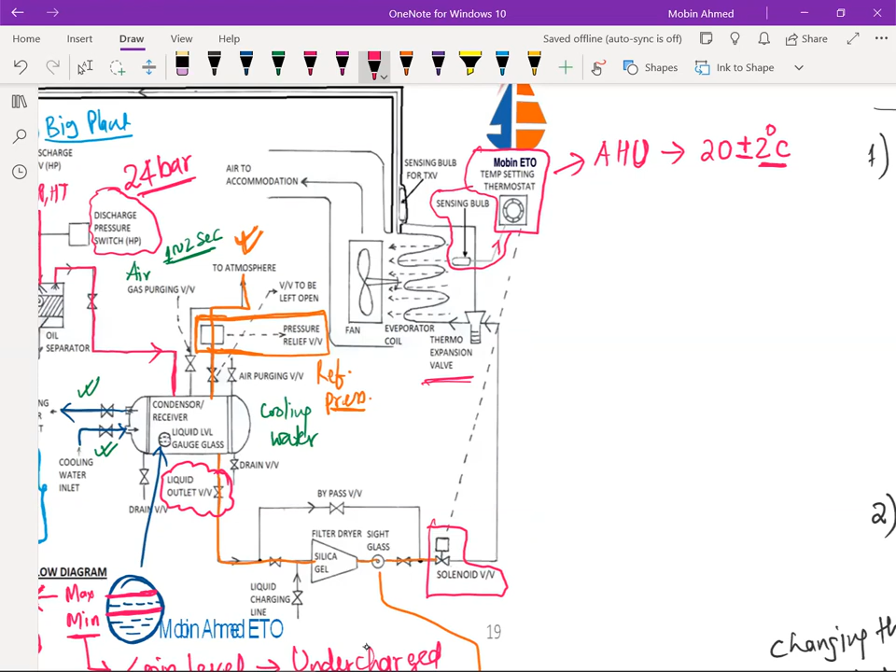Now, if the incoming air temperature is 22 degrees centigrade, it will switch on the solenoid valve, also known as a magnetic valve, MV. If the incoming air temperature is 18 degrees centigrade, because plus minus 2 degrees means a 4 degree range, this magnetic valve will be off. This is how the thermostat switches the solenoid valve on and off as per the temperature setting.

Now, when the magnetic valve is on, your LP pressure is going to increase. Remember, LP pressure will rise. When it rises and reaches 4.5 bar, the compressor is going to be on.

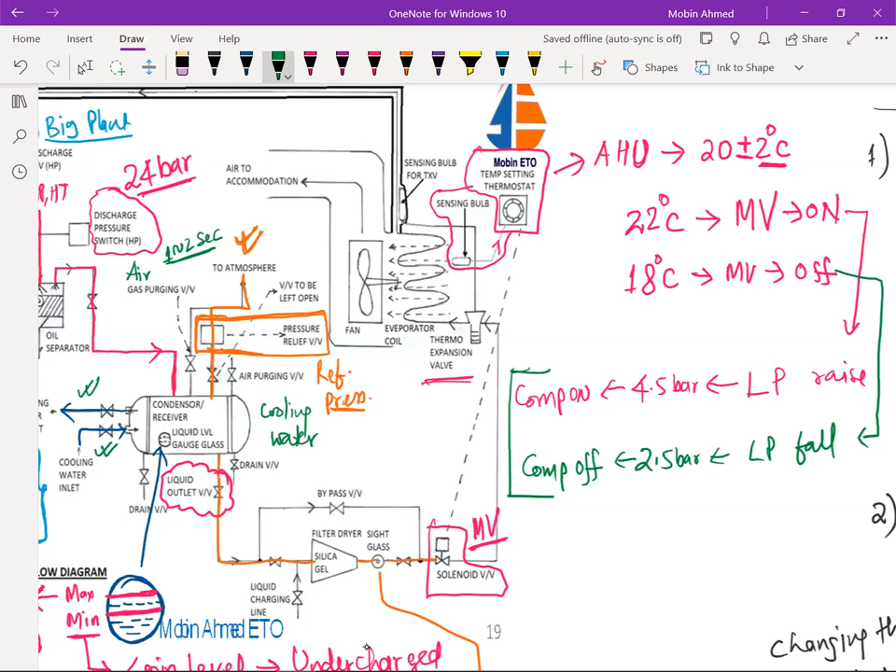Now, next is TEV. So TEV, that is a thermo expansion valve. Now this thermo expansion valve also has a sensing bulb here. You can see here, this is a sensing bulb. This sensing bulb is placed in such a way that the evaporator outlet is already having the saturated vapor. Saturated vapor.

Now, this saturated vapor. So this TEV is put so that it is going to give a 5-degree superheat. 5-degree superheat. Now what is this superheat? Remember this superheat? Okay, I will tell you what the superheat is. Now again come back to this diagram.

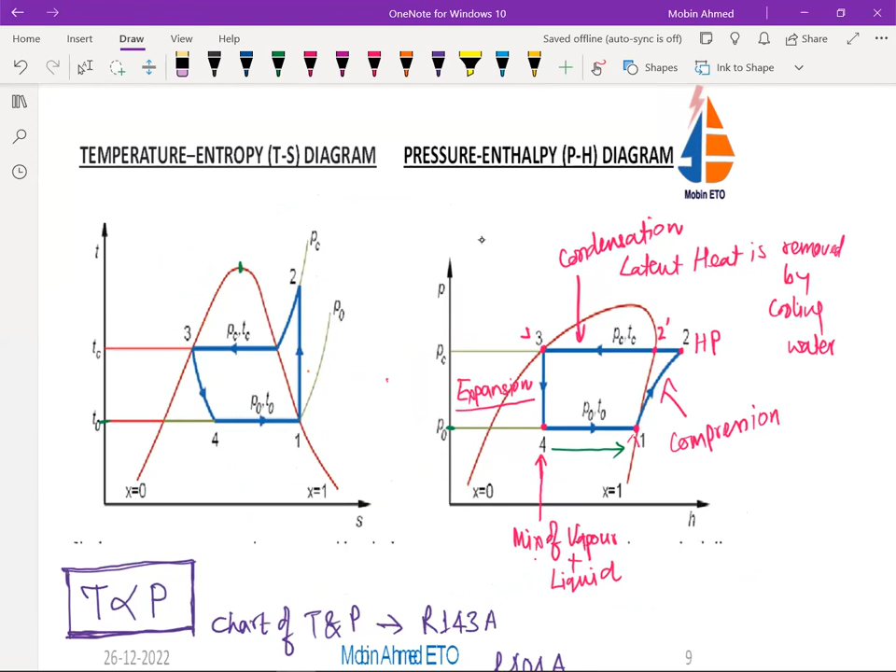When we are going to heat up the saturated vapor more, that becomes the superheated vapor. Means if I make more heating and it reaches up to here, this point. Okay, I'll just take it up to here like this. So this point means after this saturated line, if the vapor is heated more, this is known as superheating.

Similarly, if I am going to cool down below the saturated line, this is the liquid line. If I cool down further, here, like this. This is the diagram. So if it is cooled down more, this is known as a subcooled liquid. Subcooled liquid. And this is known as a superheated vapor.

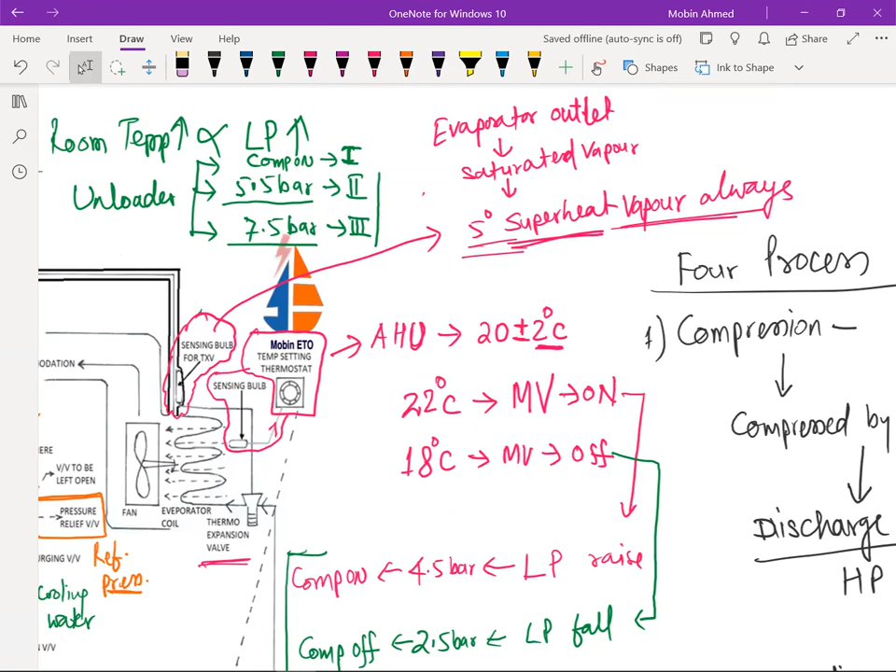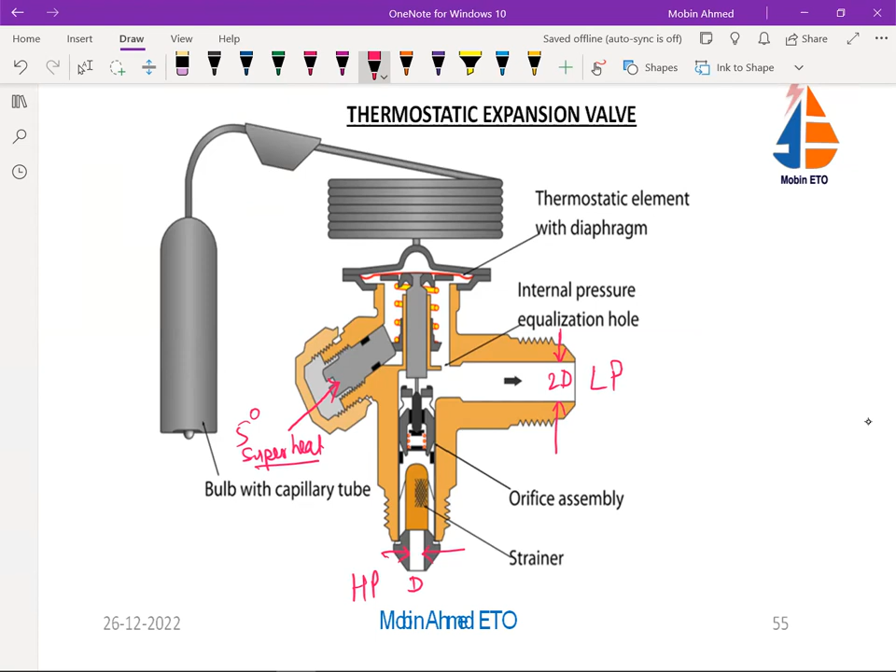This bulb is going to have the same refrigerant as the system. If the system is R134A, this bulb is also going to have the same refrigerant.

Okay. Any doubt up to here? I missed the entropy and enthalpy. Can you please explain? Entropy and enthalpy, sir. I will repeat tomorrow because now I am also tired. Okay, it's okay, sir. Yeah, tomorrow I will tell you, just remind me.